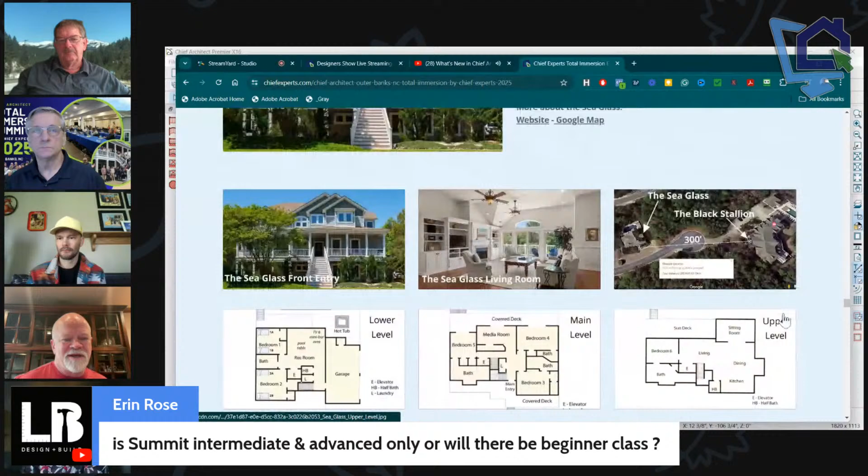It's amazing, I think we had 10 people sign up that have been at the last summit. So that's a little bit right there. And if you're curious about people's reactions to the summit, not everyone sees every post that's ever posted, although it seems like it sometimes. There are some great testimonials from the people who attended this last year, maybe even from the previous year, but certainly you can find testimonials online on the Facebook posts and LinkedIn posts, I think. Take a look at those and you can get firsthand views how that goes.

Sorry about the dog. That's okay. Dan, do you want to answer this question quick?

What is that question? Is Summit intermediate and advanced only, or will there be a beginner class? There'll be a beginner class, we cover all levels at the summit. So if you're brand new to the program, you'll be in there spending time with John and Robin, learning the program from scratch. Plus, during all the other times, you'll have times to ask lots and lots of questions, and we'll get you up to speed.

My class is more of an intermediate when I have a group in my room, and then Rene, of course, would be more your advanced type stuff, really digging into some of the things that we were just talking about as far as hidden features.

So let me get out of that page. You don't need to keep looking definitely at that for beginners as well, you guys. If anybody, Erin, if you're thinking of bringing somebody from your company who's a beginner, we'd definitely be able to help them. We'll definitely be able to get them up and moving.

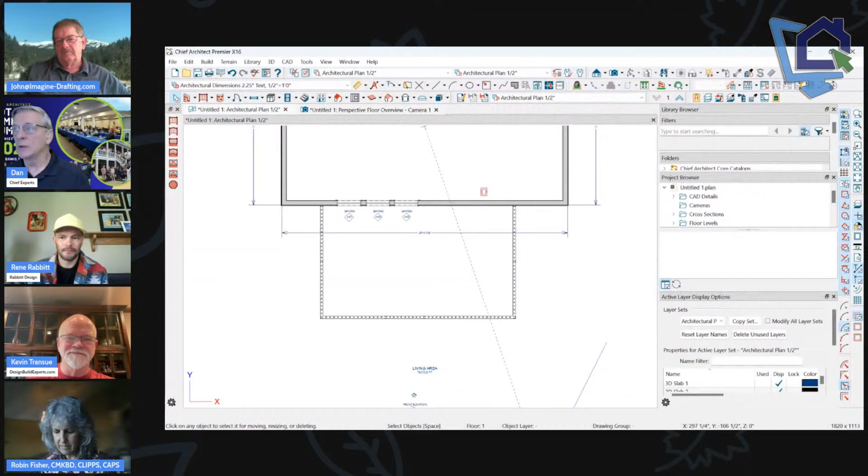So we left off with item 17, railing newel spacing. Let me comment about dimensioning railings. When you put railings in your plan, by default those railings are set up as no locate, so the auto dimensioning won't dimension them. We could turn off no locate on the railings, and then when you do an auto dimension, it's going to dimension the railings now.

Now there's another setting in dimensions I want to point out. I'm in the half inch, let me get to the quarter. I want to point out that if you double click on the ruler icon, there's a new setting in here to dimension newel centers and sides.

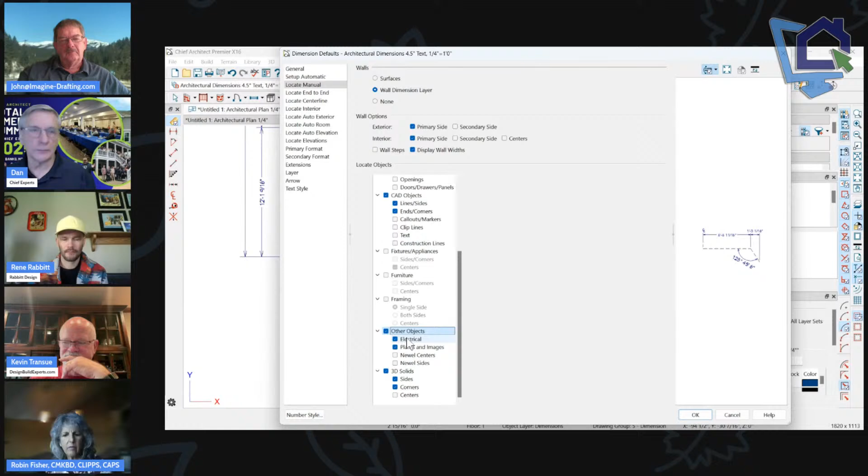So if we turn on other objects, we'll turn off the electrical, and then we'll turn those on. Let's see, I haven't even tried this yet—does the auto dimensioning do that? It does not, so it looks like we have to add those.

So when we do a manual dimension, I probably don't want to turn both centers and sides on, just do one or the other. You can set those up for each type of dimensioning you're going to use. So that's kind of new too, and that's actually quite nice to be able to do that, so that when I run my dimension through here, it's going to dimension the newels.

Then I could click on the newels by highlighting. I'm clicking right on top of the newel, and I'm going to click on this little icon down here that allows me to move the newel to select it. And then I could click on the dimension and type in exactly where I want to move it to.

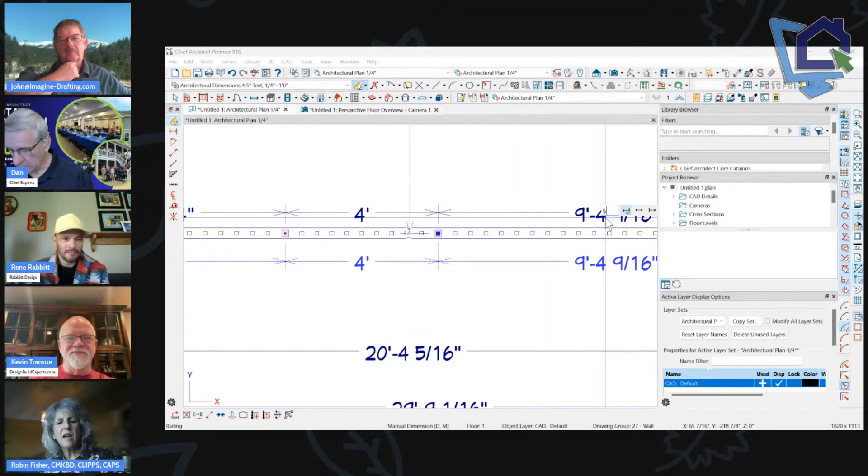So that's a nice bit of out-of-the-box thinking. We always say Chief Architect is a tool to create the thing that you want to create. So a newel is just something that can be dimensioned within a railing.

You could fake it and say that a newel is actually a baluster and dimension your balusters if you wanted to, because we have the capability of dimensioning to a thing within a railing now.

Well, I don't think we can dimension balusters directly, but you could essentially set up your newels to look like balusters.

Instead, just put your newels every 5 inches and have no balusters, so you could dimension every one of them if you really wanted to. Of course, why would you want to do that?

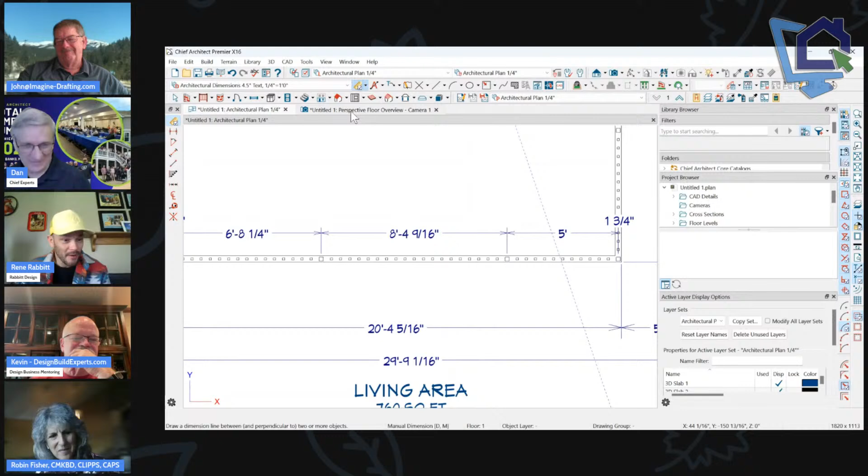I don't know. Well, because a railing doesn't need to be a railing. A baluster is just a millwork symbol. The millwork symbol could be Kevin Transue. And it is, and has been. Okay, we won't go there.

Anyway, so that's a little bit about that. And the other cool thing is you can do that all in 3D as well. I don't know, did we talk about 3D dimensioning yet? I don't remember if that was last week. We didn't really get into that. That's coming up, so we'll wait to do that then, because 3D dimensioning is pretty cool.

You can add newels as well. When you click on a railing, you can add them by clicking on the add newel button. I'm going to select a newel, and then I can add a newel.

So it's basically going to make a copy of that same newel. We have to look for the edit buttons that pop up once we select a newel. Hope that makes sense.

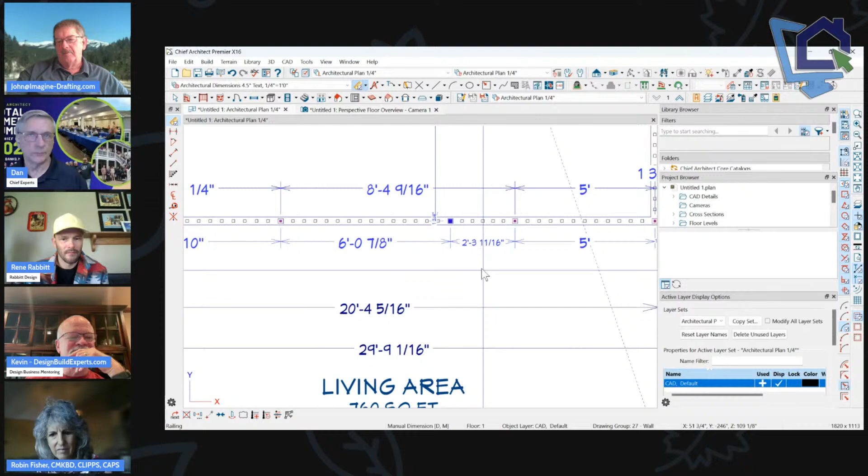And that works really well in 3D too. So in your 3D view, you can click on the railing, and you've got different newels selected. I want to add a new one, so poof, it pops right in there. Then I could add a dimension and put it exactly in place.

Hello, mute that, get those treats out, Kevin. Kevin, you're gonna have to show us your dog at some point since she's wanting to be involved. We'll have to see what she looks like.

So the only thing I didn't like about this new newel tool is we can't use different kinds of newels. I can't put a short newel in with tall newels, like a post, and still have those intermediary ones. Sometimes you'll have a plan where you've got your posts and a beam coming through, and then you might have a post and a post, but you want a couple of short newels where your steps are. You can't do that.

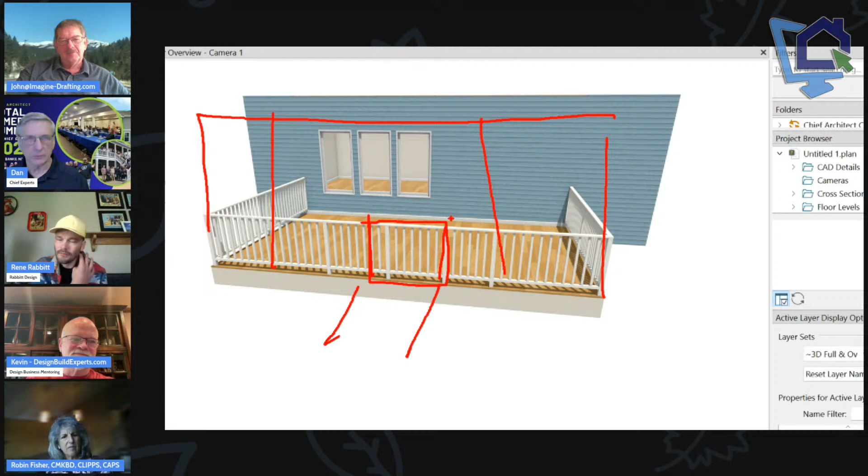So we'd have to create an opening here and add those newels separately. I think we could. Well, you can do it by changing the wall type and then setting that wall type.

Oh, that's true. Break the railing, and I wonder how that would work. Does it work? Oh, cool. I've not tried that. So if we break the railing in a couple of spots and just change it to a different railing type, then we could do that.

Why won't my break work here? Come on. Whatever. You do have to watch out for where you've got ends, like right there. You end up with a double because you've got to watch out for end railings and start railings, or end newels and start newels.

So, yeah, but I could delete that one. Or you can turn it off for that wall section and say I'm not doing end or start newels. Exactly, right, so there are lots of options. It's kind of interesting thinking about how all this works.

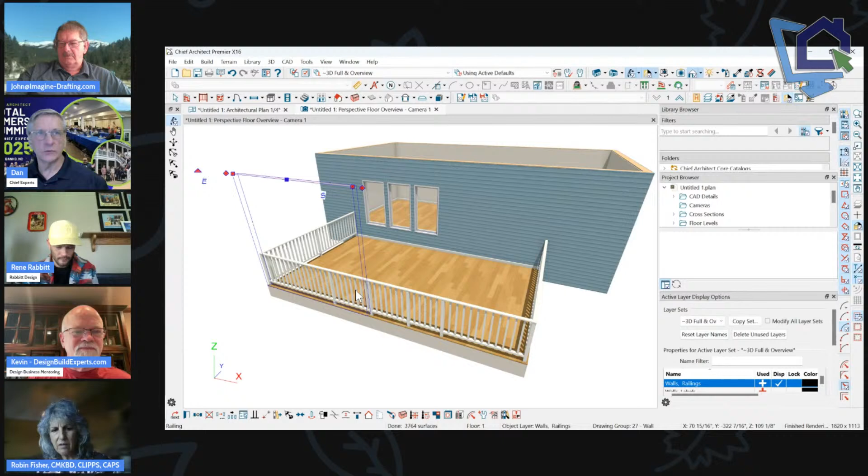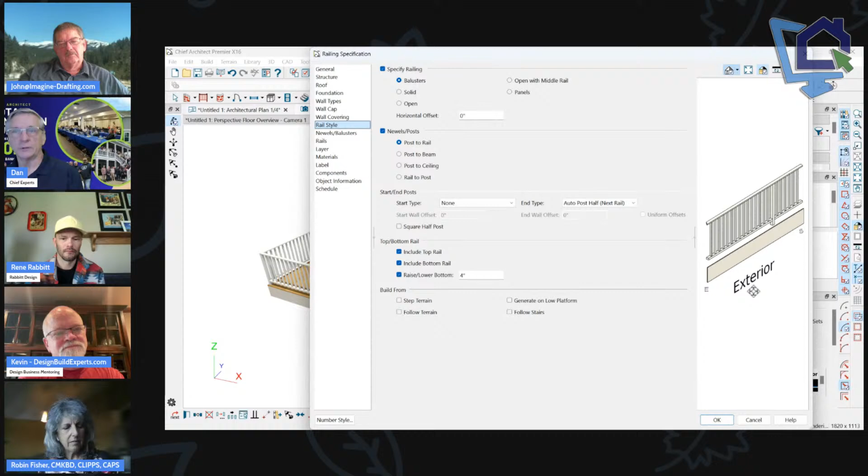When you look at the dialog box, especially for railings, there's so many options now. I always think of it as how do I control all these boxes? I want to add boxes, remove boxes. That's how I think of everything in Chief Architect - it's just a bunch of boxes we're putting in our plan, Chief creating some automatically, some manually. How do we control those boxes? So if you look at these settings with the idea that you're controlling boxes somehow, it makes it a little easier to make sense of this stuff. When we look at rail style, post to a rail, these are different kinds of boxes - how do we control them, turn them on and off? If you take the part out of it that you're thinking about creating this fancy railing, and all you're doing is creating a bunch of boxes and controlling them, that helps a little in the thought process of how you work these tools.

Does that make sense at all? Well, I agree with, I think Bruce Robinson - yeah, Bruce said this up in the chat, but I agree with him.

That being said, I just did a porch the other day where I did it all with slabs anyway, because I was having too much trouble getting everything to go in place. It's just quicker. That works too - it works just fine. So whatever it takes, sometimes you just need to do that. And part of the reason I did that was...

I'll show you real quick since we're on this kind of stuff. That was this one right here - that was version 5, here it is. I'm just in the mode of doing quick, down and dirty, get it done type stuff. But I needed to create a deal where I wanted the steps to come into the slab, so that created a little bit of an issue. I wanted a beam on top, and I wanted steps into the porch, so I just did it all. These are foundation walls, but I did my slab - everything's a slab. It was just easier for me to control exactly where I wanted everything to be. So sometimes you just still have to do that.

I still created a room and named it a porch, but I created everything else out of slabs. These kind of stairs are a little tricky when coming into creating this kind of look. Looks great though - yeah, it turned out nice, and it wasn't hard to do. You create one post, copy it over, and then I can dimension everything exactly where I want it. Just trying to get that set up. But yeah, just thought I'd point that out.

Okay, back to Chief, we're on number 19: add stairs and ramps to the library. Have you ever gone through the trouble of creating a stair, putting all this work into the design, the number of treads, risers, the way it looks, the balusters, the newels, and three months down the road you go, I want to use that stair again - which plan did I do that in? Of course, if you're me, I don't remember. So now you can take any stair that you create and put it right into the library, which is really nice.

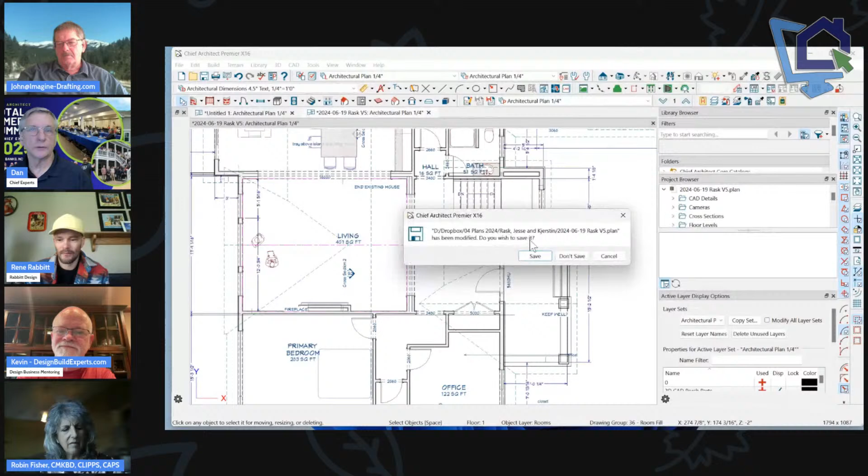So if you're creating a stairway that's like a U-shaped stairway, you're not adding the U-shape manually. Whoa, how'd you just do all that? Do what? Oh, that's secret, man. Fast little staircase you set up right there. Well, wherever the landing is, you click and put the landing in. Okay, I'll explain it - I drew stairs going this way, and then I drew some stairs going this way.

As long as you have the stair icon highlighted, you just click where the landing goes and it puts the landing in for you automatically. It also broke in between where you had a gap there as well.

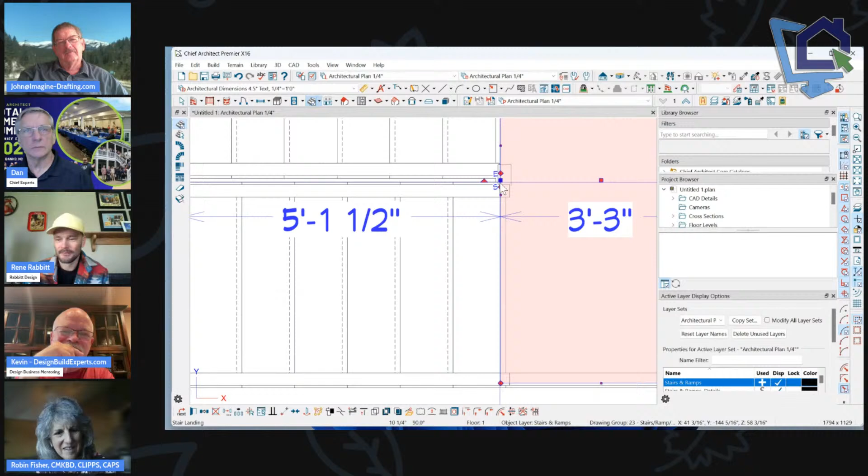Did it turn the railing off there? Let's see what it did. It should be on, yeah it is on. So this platform, this landing, is a CAD box where I can control the railing on every edge of it, or all the edges at once, using this icon here, or by opening the dialog and going in, turning off the railing, has railing apply to all edges.

Kind of cool how this works. There's no add newel on the railing, right? I don't think so, because we can't select the railing.

But what you can do is break the landing. Thank you, Kevin. I was saying the same thing, but I was muted.

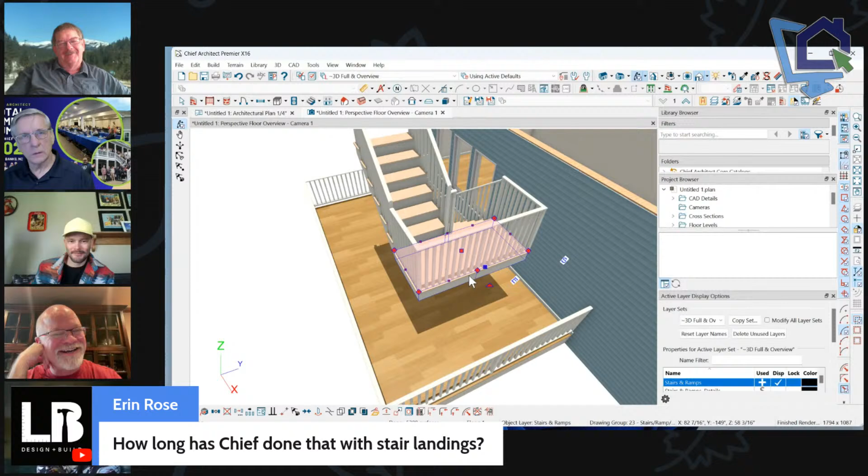I'm just your ventriloquist. So what does that do?

It puts... okay, so this might be. Oh, it just puts a break in the line. It'll put another newel right there. Don't pull it out - yeah, you didn't. Well, I guess my newels are kind of the same, so yeah, I guess that is bigger than that. Okay, so put a break where you want a newel.

How do you curve the inside walls, the inside corners of those stairs? Just the inside corners, like an older style where the railing curves. Are we talking about the corner landing area here? Yeah, well, in any set of stairs, right. Well how do you curve that inside? This is not a stair, this is a landing.

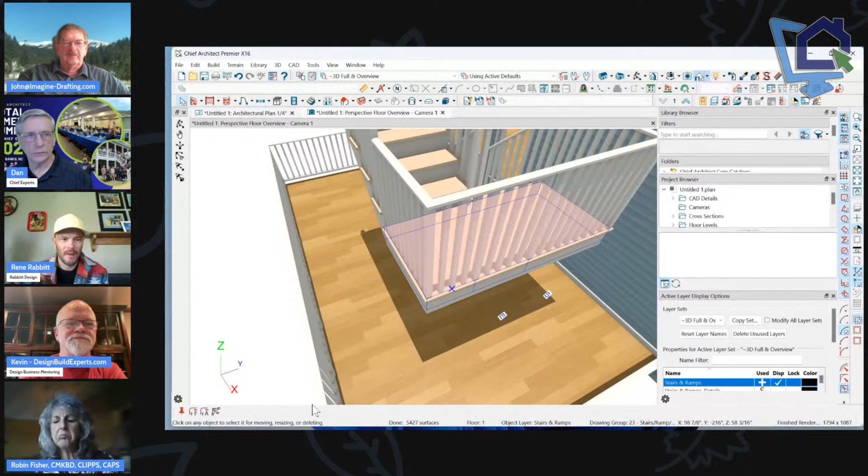So how do you curve those inside corners? You just fill it - fillet on the inside corner. Yeah, hold your F key and drag in that dimension. Yep, perfect, thank you.

That's perfect. I appreciate that. So we need to answer Erin's question here - almost forever, how long has it done that with stair landings? Yeah, almost forever. You learn something new every version, version 2.

And then Mike has a question here about how you need to go through the process of getting it into the library and stuff, so we can see. Let me close up some stuff here.

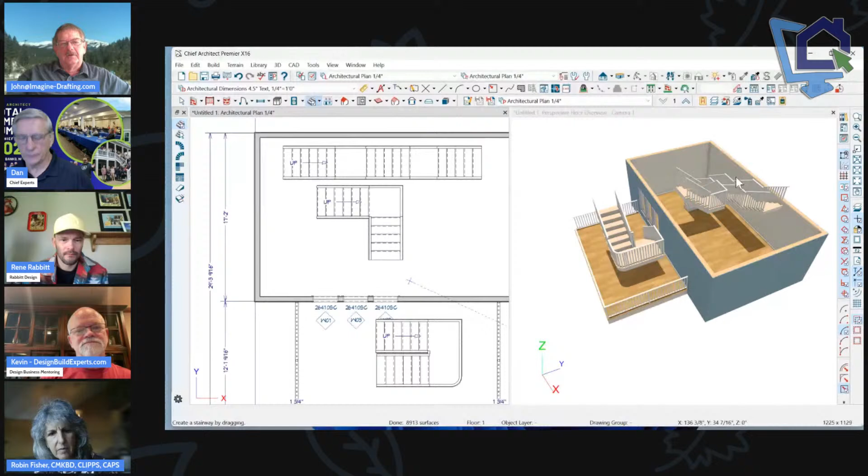If you leave it automatic - let me point out too with stairs, it doesn't matter how your stairs are shaped. If your stairs continue and you need a landing between them, just click between where the landing goes and it'll put the landing in automatically. If you're doing an L-shaped stair and you overlap the stair there a little bit, it'll actually push them into the right place too.

It'll push 'em up. So if we're just overlapped a tad like that, and we put the landing there, see how it's going to put it in the right place. I always dimension this exactly before I put my landing in. That way I know exactly where it's going to go.

I just finished a project where those stairs did creep 6 inches into the other space, and I had to do that as-built, and it kept pushing my stairs out to where they belong. I couldn't - so you have to do that manually, like that.

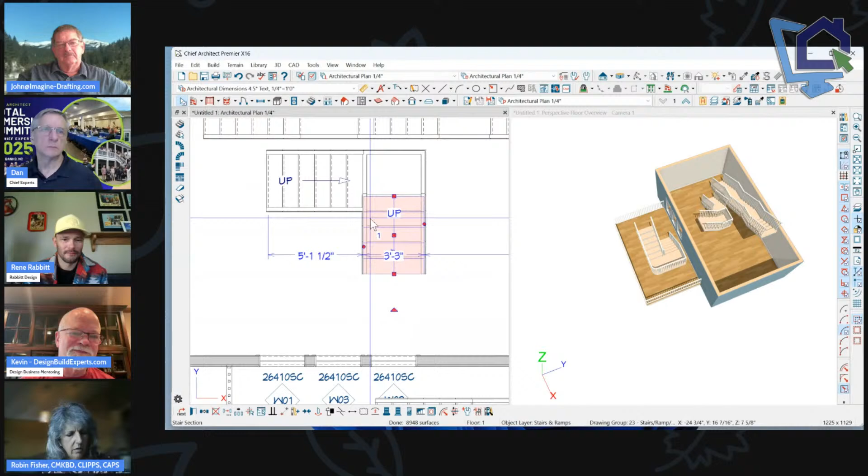Of course, I don't know how we turn that railing off there. Break it and make it a section. Oh, that's true, yeah, do the break tool. Break it there.

Retain it - did I need a complete break on that? I needed a complete break on that. So that's the tool where we hit break, then we have to hit this icon right here with the C on it. That adds a complete break, which now lets me change this whole step totally independent of any of the other steps in my plan. So I can take the railing off right there.

So now I can - you have to shift select it. Do I have to shift select it? Yeah, that's right, to just do that one. That's another little trick. So I could turn the left railing off - now I have no railing on the left. Or the right - oh, I'm going up. Okay, so it should be the right railing, I was thinking it was going up that way. Yeah, so we'll go that way. Now we just have railing on one side.

So turn the railing off on the landing and you'd be good to go.

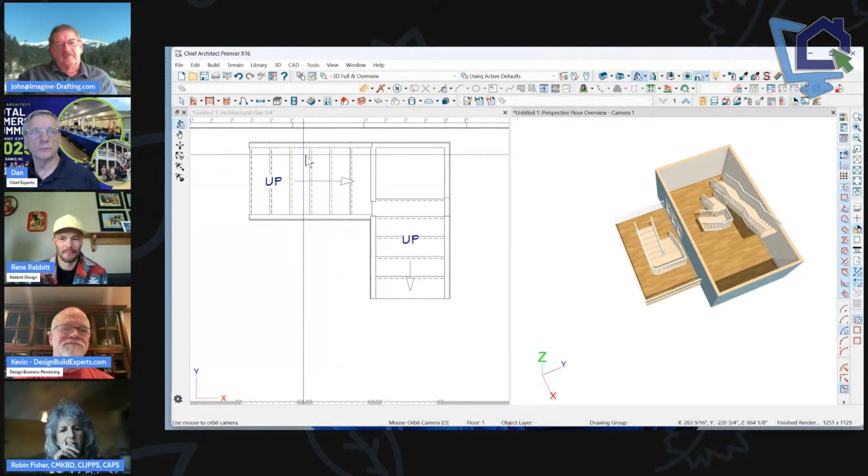Turn that railing off there. Someone will still fall to their death, but something didn't get connected properly.

Anyway, how do we save it to the library? Just click on it and hit the library book icon. But then you have to deal with Mike's question.

When you save stairs to the user library, how does that account for different ceiling heights? It doesn't let you say anything. But you can still click your stairs and it will automatically adjust heights so long as you don't change that.

See, in the preview, when I added it to the library, it didn't put in that whole stair. It just put in one section, just a piece of the stair.

When you want to create new stairs out of that style of stair, you just start drawing again, and now you'd be drawing with that, not the default stair that's set up in the program. It's like a style palette for stairs only.

Bingo, yes. That's a really good analogy of how that works. Good job, Kevin, nicely done.

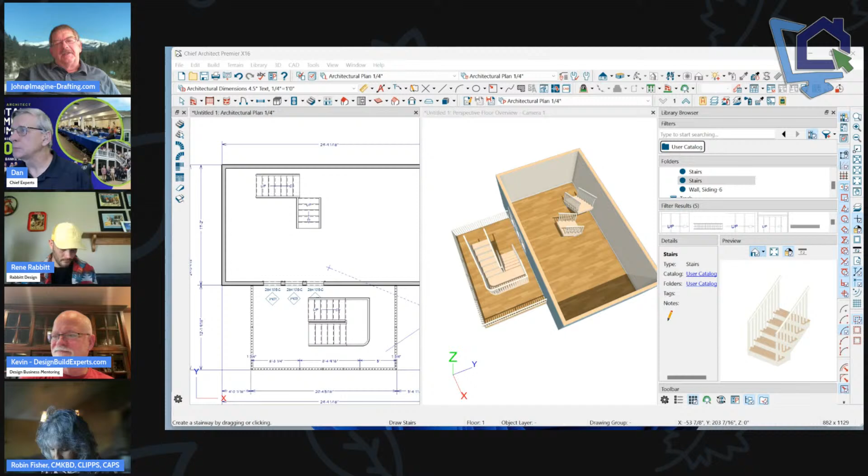Dan, I need to apologize to Aaron. I feel like I kind of jumped under the question there, and I didn't handle that the way I should have. So anyway, I apologize, Aaron.

What happened? I missed some. Yeah, me too, I jumped under the question and just said that it's been there forever, but we don't want to do that.

Oh, John and I always have fun with that. We'll show people a feature and they go, how long has that been there? And we go, yeah, for like 30 years. As long as we're on that topic, the part that's even more fun is when Dan says, well, how long's that been there? Yeah, exactly, I do that too. It happens to all of us. And it's just part of the deal.

But yeah, creating a landing by clicking where the landing should go, that's been there for a long time. Now you got it, so there you go. There's a lot of function in this program.

That's amazing. All right, add stairs to the library, corner shelves. That's just what they are. Pick on the shelf tool in the cabinet pull down, and you can now click in the corner and do corner shelves. And then you can click on that and open its dialog and tell it to be an L shape or diagonal front.

And then you can stretch it out. So that's helpful, it's another little feature that we don't have to mess with when we want to create corner shelves. Instead of using two shelves, you use one.

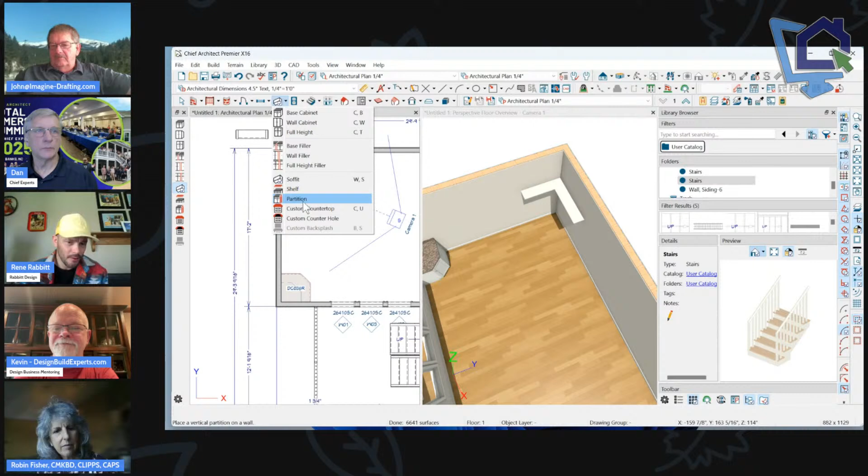If you double click your shelf tool, does it give us the ability to change that corner to not a diagonal as a default? Oh, under defaults for cabinets, let's look. Yeah, I could have just double clicked on the cabinet tool. Can I set the shelf default? No, that's locked in, it's always going to start as diagonal.

If you click on the one that you made that is an inside corner, can you set it to default now? I don't know, let's find out. No, we can't. Okay. I bet I can't do that with any of the corner items.

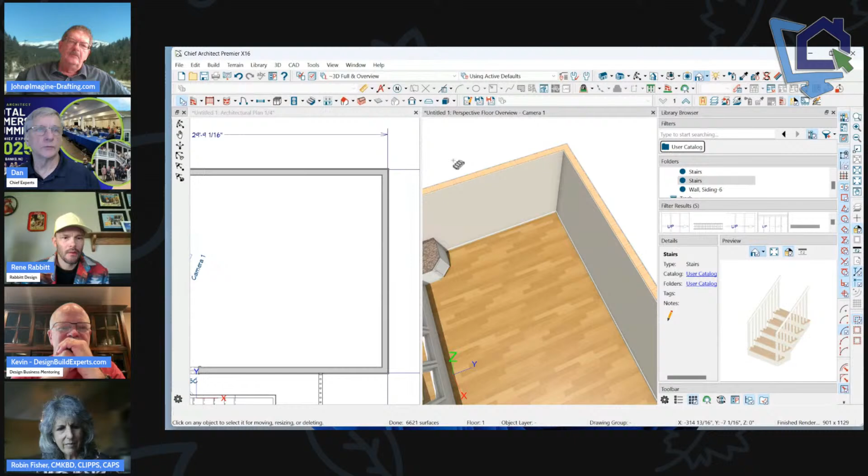So let's click on a cabinet. No, I can't set that to default either. So only if they're in the middle, straight on the wall, then you can change them and set them as a default using this icon. That would make it the new default in your plan, so everything you add would be that now.

Good question. I suppose it'd be tough, if you stretch something out real goofy like that, you're just confusing the program more than they want to be confused if you make that the default. Really the default is about the style, but it's also about the size too.

Do this. Can you do this? Can you place a corner and then make it L-shaped? Corner shelf, and then yeah. Now, can you make that default? No, we can't. We could add it to the library though.

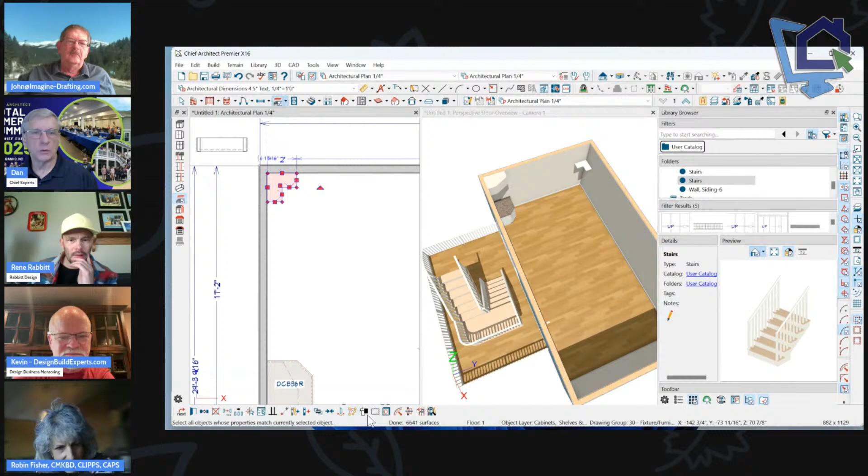So now, if you set it back to none, make it the default, and then try to place it again, does it become an inside corner? It does. So you'd have to place a corner shelf first.

So just open that, make it L-shaped. Okay, press OK. Now bring it towards the middle of the wall. Well, yeah, it maintains it. Now turn it off, open it up and say none. Well, that'll make it a flat shelf again. Now make it default.

Okay, now use the shelf tool to auto place a corner. Is it an inside corner? Let's find out. By golly, wow, you did it, Rene. Good job.

What was the step after make default? Kind of convoluted, huh? What was the step after setting default? After make default, just place it. Do it from the cabinet. Then just move it. Okay, then place. Okay.

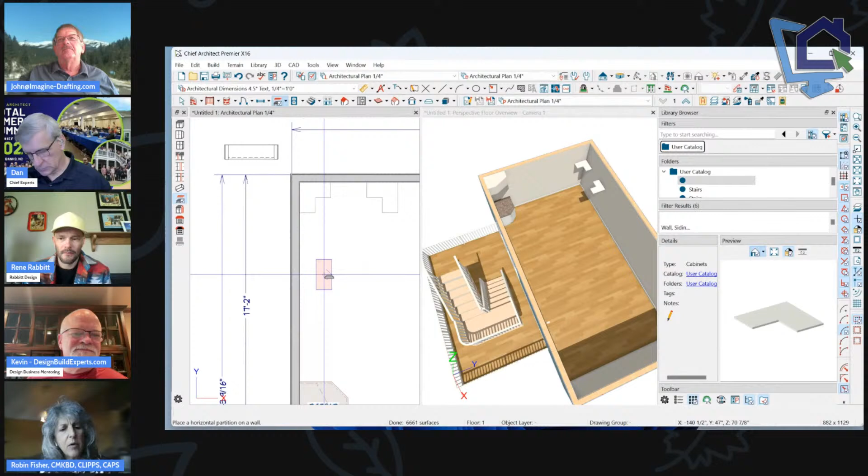So if I look at my defaults now, they're still not set to either or. It's still set to none, but it did hold that corner shape. So now when you take it, can you put a new shelf into the corner? Is that what you just did? Yeah, he did. Okay, got it, I was writing it down at the same time you were saying that.

Does that rule hold across sessions? Does that actually make a permanent change, or as soon as you come back into it? No, I mean, you'd have to commit it to your template. Right, yeah, that's what I was just wondering.

Yeah, so let me just put this in, Rene, so that will work in a corner cabinet too, so we don't have to deal with those angle cabinets all the time. Got it. So if I close this session out, get out of Chief, and we come back into it, and I open that plan, will it still do a corner shelf?

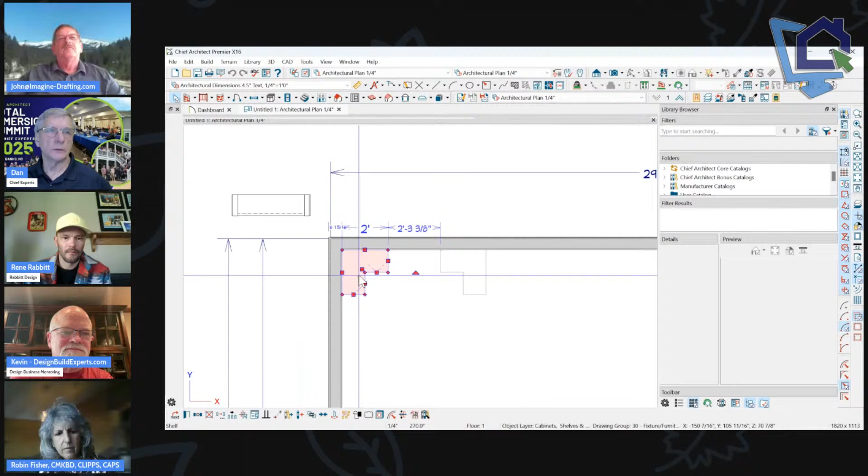Let's find out. Look at that, Rene. You nailed it, man. All right, cool, nice. So you created the L, you pulled it away, you made it none, and then you made it the default, and it held that L shape for some reason.

That's funny. You could probably do that with your cabinets, all your base cabinets, soffits, and everything else too. So it's a nice option, I like that, that's cool. I always want to know is how did you figure that out? Yeah, that's hours of time, we're not even going to go there.

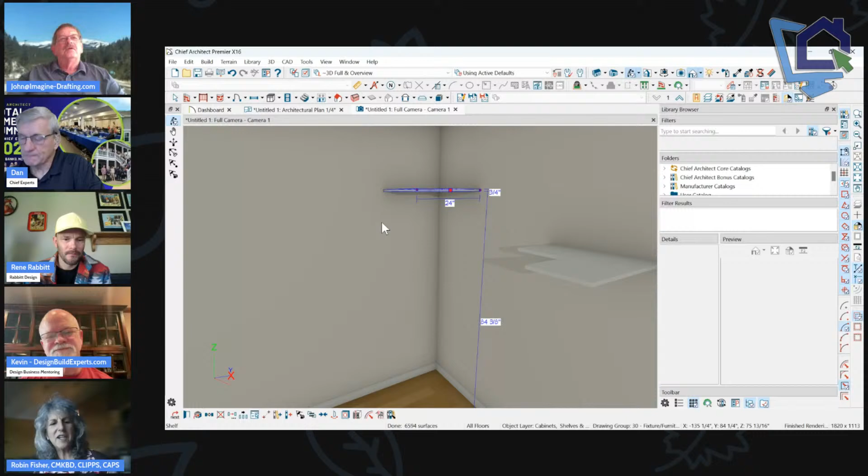Did it really matter that you made it none? Was that step actually necessary? Maybe not, yeah, maybe not. Okay, but it works, even so we're going to deal with it in the corner. Good point, well let's not dwell on it.

Just real quick, you want to make more of those? Let's go make 6 more copies, and we're going to space them all out at 12 inches apart. So I hit transform replicate, this icon right here, and we're going to space these out all at once. So 6 more copies, 12 inches apart, but we're going to go down, so we need to put a minus in front of that 12 and click OK.

See the Z right here? That's this little thing right here, that's the way we want to make our copies. If you wanted to go Y or X, you just look at the other ones. Click OK, and there's your shelves. You could also do that by dragging them using the multiple copy tool. If you can get to the 4 handles, get to the multiple copies, set your multiple copy, evenly distribute 3 or however many, and then do it that way too.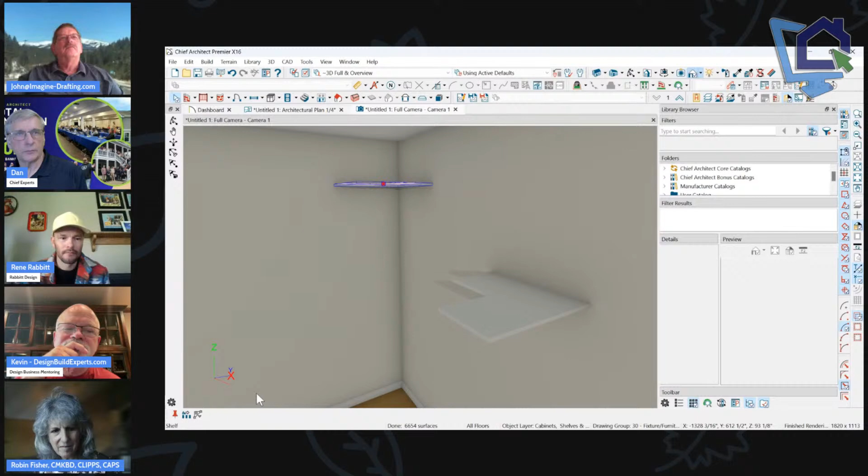Oops, I missed. Let's hit multiple copy again. Why is it not working? It's only going side to side. I bet I'm grabbing the wrong button. Yeah, I got to get this handle right here. That's the handle I need. There we go, now we can do it.

Nice, anyway, lots of ways to make copies. All right, let's keep moving on. We got two done so far. We're going to be on this for a while, you guys, but we're learning. Build framing panel, which is really cool now.

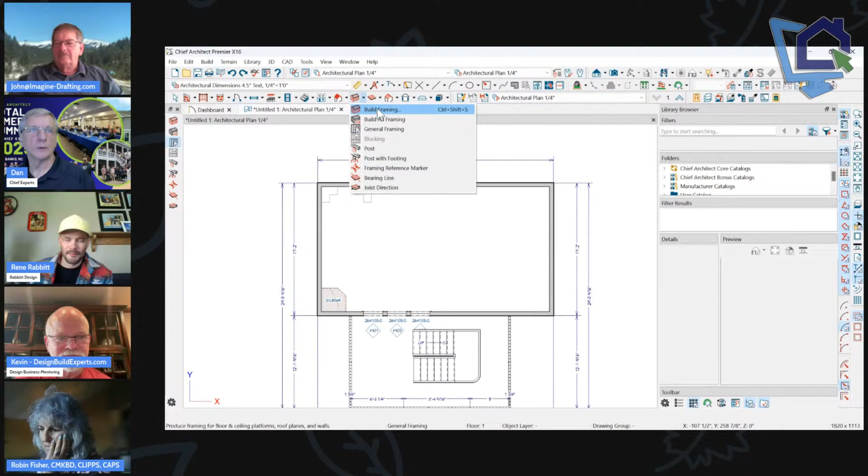So whenever you click on the... where's it? Right here. No, where'd it go? Right here, build all framing. Okay, no, that's not it. We want this one. Yeah, so we want to click on this first one. This one just builds all the framing. That doesn't open a dialogue.

So we want to choose what to build. What we used to have to do, we used to always click this menu, and then click through each floor, find what we wanted to build, and click on it. It was really a pain in the butt. So this makes it really easy.

So I want to automatically build all of these, or maybe I don't want to do my walls and roofs, I just want to do those things. And they've added a separate option for ceilings now, finally, so now I can do ceiling framing all by itself. That always used to be where we had to build all framing to do ceiling framing. Now we can do it per room or the whole plan, just the ceilings, which finally encompasses all the things we need to frame.

Ceilings were missed up until this version, which always baffled me why they didn't put that in there. But they got it, so we're good to go now. So that's a nice little setting. Again, just click on that one. I wonder if that's that part here too. General framing - yeah, this is where you would set your defaults.

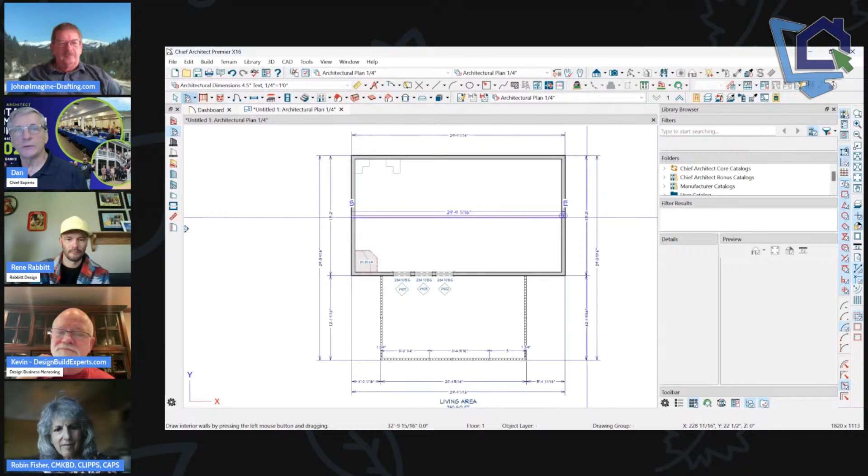So never mind, okay. Truss direction lines. So when you... no, flat header, I missed flat header, heaven forbid. So sometimes you're going to have walls in your plan that you don't need a header above, any kind of structural header. You just need a plain old flat board to nail your trim to.

There's no support involved. So if I were to click on that door or window, open its dialog, go to the rough opening tab, the framing tab, you have the ability to specify what kind of header you want above that door or window. We could call it a flat header. So now it'll be 2x flat headers, whatever the thickness of the wall is. This is a 2x4 wall, so there'll be 2x4s, because the thickness is determined by the wall type.

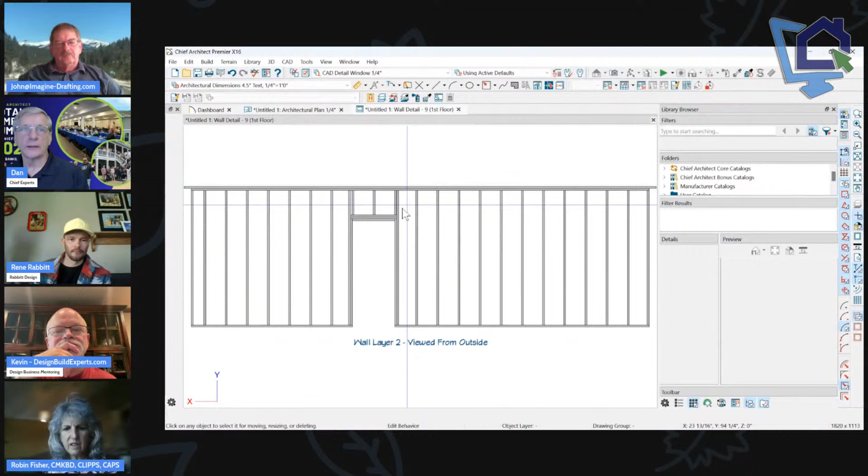So now when I click OK and frame that wall, let's turn the framing on here, and then go look at it by clicking this button, open the wall detail. There's your flat headers right there. Okay, it would have put a third one in. So it put that in plus a third one. That's weird. Yeah, so just something to be aware of.

Another little thing they added in X16, which is kind of nice: you might be working on framing and decide you need to change something. If you click on any item in this view, you can now rebuild the framing for that item, for that wall or roof panel or anything you've clicked on. So I can rebuild the framing for that item right now, which is really handy. I don't have to go out of this view, click on my floor plan, rebuild the framing, and come back into this view. I can just do it right here.

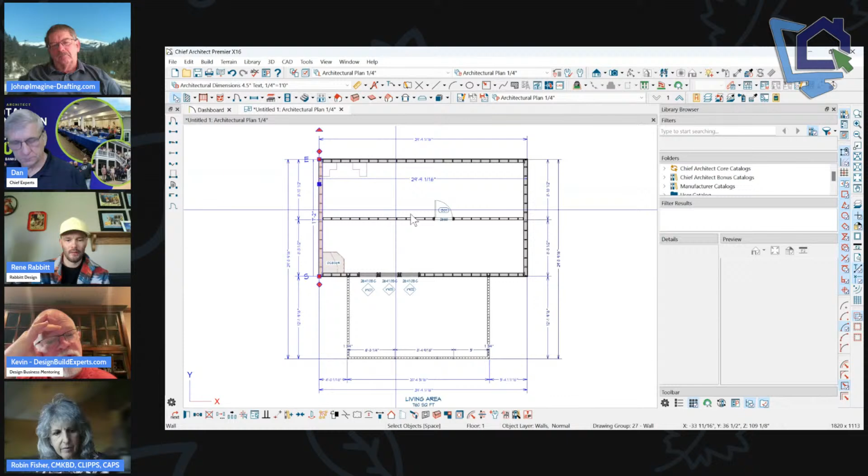Dan, just the other day, I ran into a situation where I ended up rebuilding the framing in this roof multiple times as I worked through a design, because if you lay the framing out for a hip roof with a clipped corner, it chooses very strange things for the framing. Some of the framing would not align, even on opposing sides of a ridge, so sometimes it was 18 inches, sometimes 16, sometimes 24, whatever it happened to decide.

So could I have clicked on that and it would have rebuilt the framing correctly? Or is it just going to mess it up in a different way? It's going to rebuild all the framing in that object. For that entire roof plane or for the entire roof? For that entire roof plane.

So it should have made corrections to it if that tool does what... Yes. So again, you just click on the item and reframe just that item, not the whole thing. Oops, wrong icon. You don't want to use this to rebuild that. That would build the whole plan.

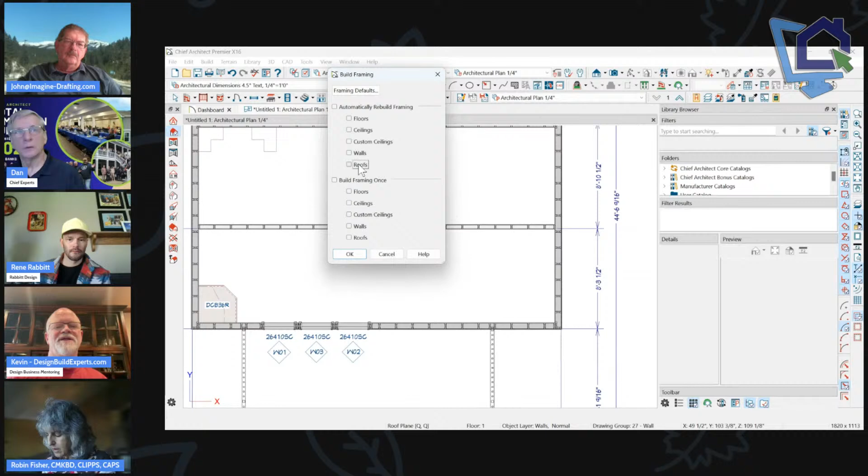Oh, it's interesting. I learned something new today. All right. Hey, we're on a roll.

Can you answer Aaron's question here? Is there a way to freeze custom framing so it's excluded from the rebuild command? For walls, yes. Roof, let me address that in just a second here.

What am I doing? I'm making those gables. For walls, anytime you put framing in a wall, like I changed the framing in that wall and I want to make sure it doesn't ever change, you open the dialog for that item and you go to Structure.

And you go to Retain Wall Framing. Once you do that, you'll notice that now when I click on that wall, I don't get a framing icon anymore. I can't rebuild the framing in that wall. And if I rebuilt all my wall framing here, it would not redo the framing in that wall. So yes, you can lock that out.

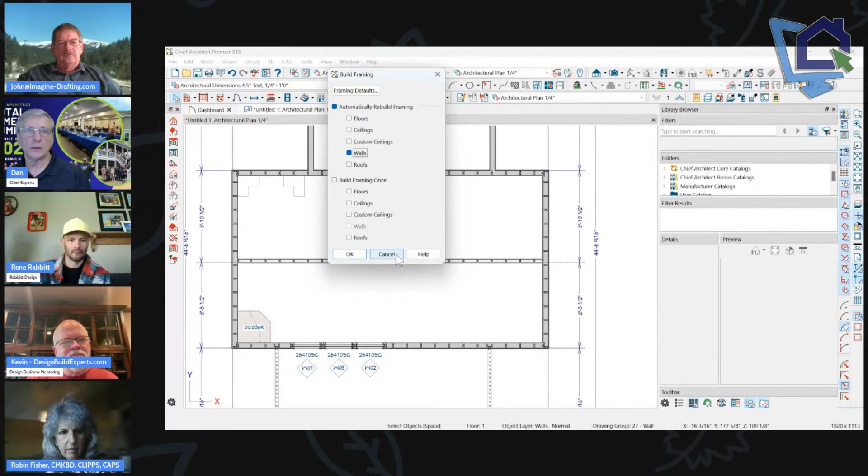For the roof, yeah, go ahead. For that wall, yeah. For the roofs and floors, I don't think we can do that. If we're going to rebuild all the roof framing, it's going to rebuild all the roof framing. What I generally do is, depending on what I'm working on, I might just frame one roof panel at a time.

So let me just go build the roof here. So if I want to just frame this roof plane, or both of these, I could do that independently of all the other roof framing in my plan. So that works really well. That's just something to keep in mind.

Oh, that's really good. So when I'm doing room additions and things like that, I'm not going to frame the whole house. I'm only going to frame the new stuff.

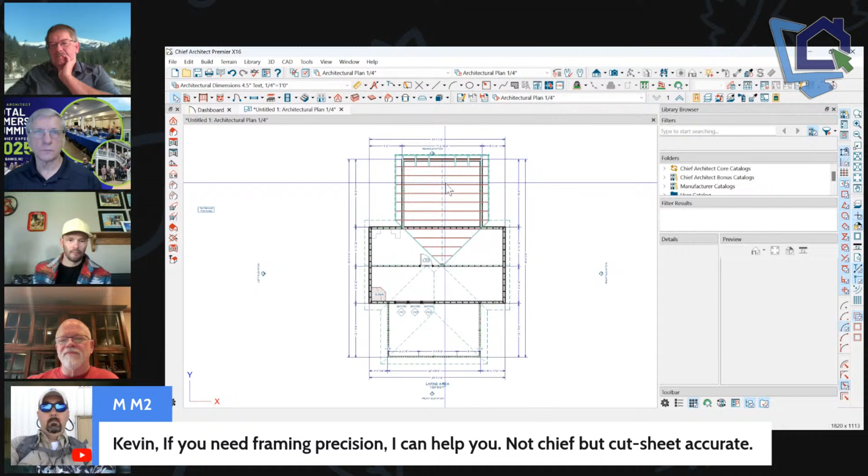So now if we do this next truss direction line, Chief does have a girder line now. Where's that? I don't even know. It's probably under the roof tab. Oh, Roof Purlin—that's a new icon, isn't it? You can add roof purlins manually.

Cool. Girder truss line. So if we put that in, let's say I want to have a girder here because I'm going to open up that wall. So I'm going to take this wall out, and I need a girder to support that whole section right there. So I could put a girder line there.

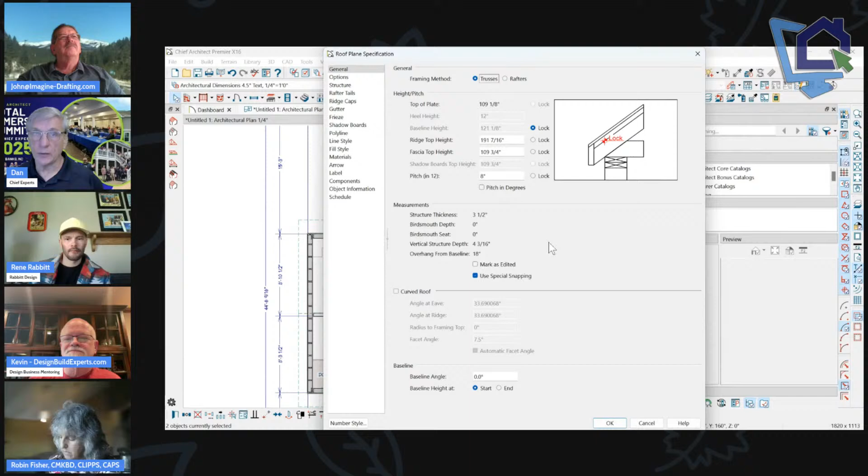So when I build that roof framing now for these two roofs, I've marked the roofs as trusses. That's important—you can do roofs, trusses, or rafters for the entire plan. Then independently, you can click on roof planes and say, I want this roof to be rafters and I want my other roofs to be trusses. So you can turn it on and off for different roof sections you're working on, which is really nice, because then if you build the whole plan at once, whatever you call rafters will build, and whatever you call trusses will build. Then we click OK.

And I'm going to go ahead and build my framing and see how I put the girders there. Let's say—you wouldn't normally do this, but let's say I want these trusses to go this direction. Then you put a joist direction line in, I think that's what it's called, and then I could get the trusses to go here. Let's see if that works. I'm not sure if it does. No, it didn't do anything.

They showed something in one of their videos about how you could switch directions - I think it was joist direction, or girder. Let's see, custom framing types... I don't remember, but you could switch directions. Let's try this one. Oh, roof truss direction - there it is. Not the joist direction, it's roof truss direction. So if I want these trusses to go that direction from that girder line I drew, these will go that way and then these will stay that way. So you can switch the directions by doing that.

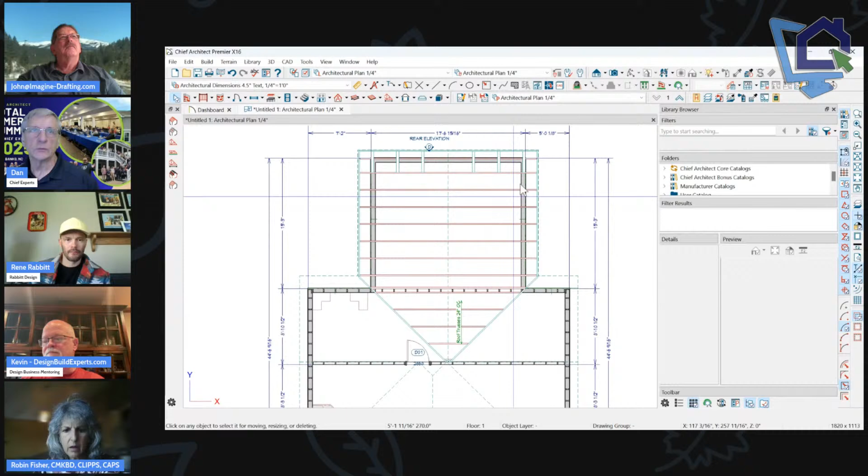So if I click here and hit build framing, now, again, not that you would do that, but you could. Who knows why you would want to do that? Maybe that's the right way to build it. But you can do it now, so that's really nice. That makes sense. Any questions about that?

24 custom framing types. Anybody know what that means? I tried figuring that one out. If you were trying to do advanced framing or double wall framing construction, would that be there? It's something to do with framing materials associated with framing materials. It made no sense to me. Rounded, IC, I don't know. We'll skip past that one. One day I'll figure out what that means eventually.

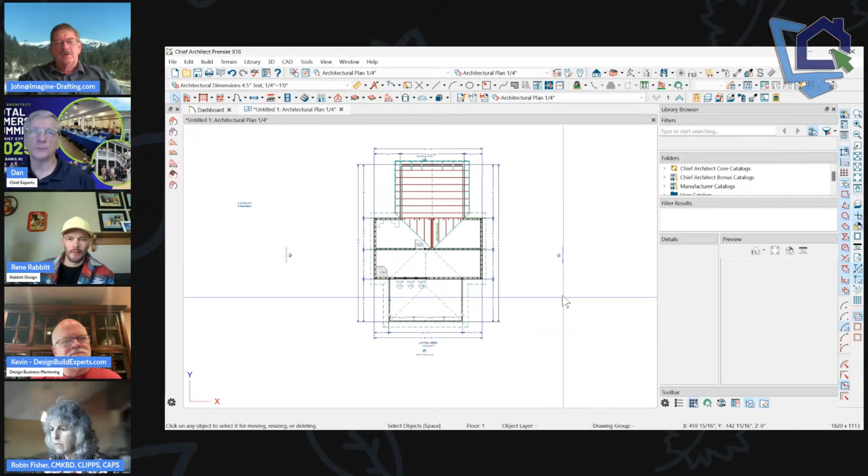Maybe if you guys happen to know, let me know. Deck controls - what did it say again? Number 24, figure that one out, John. It says add, remove, or modify framing material associated with framing materials. Define material composition like wood, steel, or concrete, and shape - rectangular, rounded, or ICUs. Okay, it made no sense to me.

All right, let's go back to our deck information, because we got some cool things going on with that. So again, anytime you name a room a deck, it's going to put the deck framing in. Because I don't have a foundation, it put the deck framing on the same floor as the deck. As soon as I add a foundation, build foundation, click OK, now it's going to put the deck framing on the foundation plan. So that's how that works.

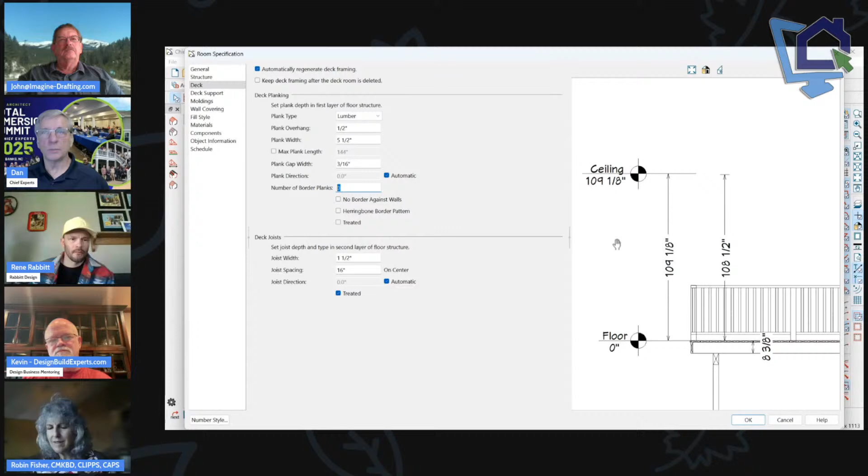So what we've got now in the deck room dialog box, under the deck, is the ability to, when we do a border plank around the deck, put the blocking in for that automatically. So if I say do 2 border planks, click OK, and then rebuild the deck framing using this build deck framing button, you're going to see it put that blocking in. So the 2 deck boards would be supported by the blocking. So that's nice - now we don't have to do that manually. It even does the corners, which is another nice touch. I don't know how many times I had to go do that to decks to show that framing - more than I want to think about.

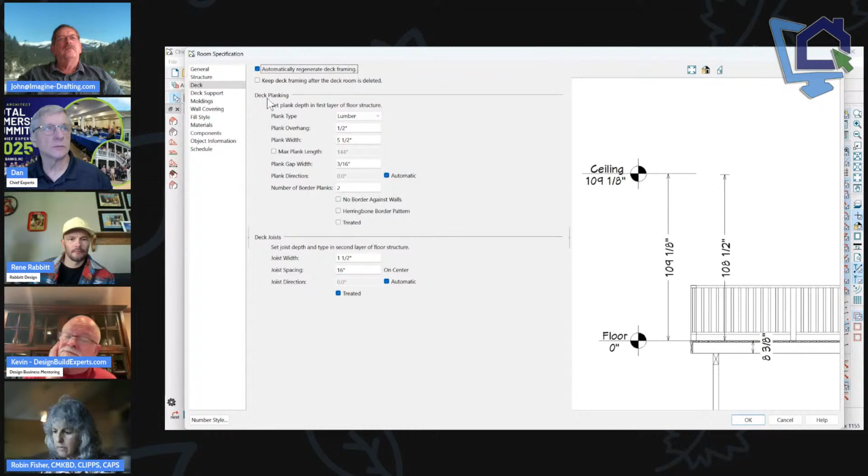The other thing you can do, again in the deck dialog box under deck support, you can edit the type of beam you want, lumber, what kind it is, how many beams there are. Let's see, where's the number - where's the count? It says member count up at the top, oh there it is, thank you. So how many beams do you want - okay, you want 2. I want those to each be, not 3.5, but 5 or whatever size you want. So maybe you're using laminated beams that you're going to wrap up. You can see it just changed it - that's cool. I love how it shows what it's going to look like too.

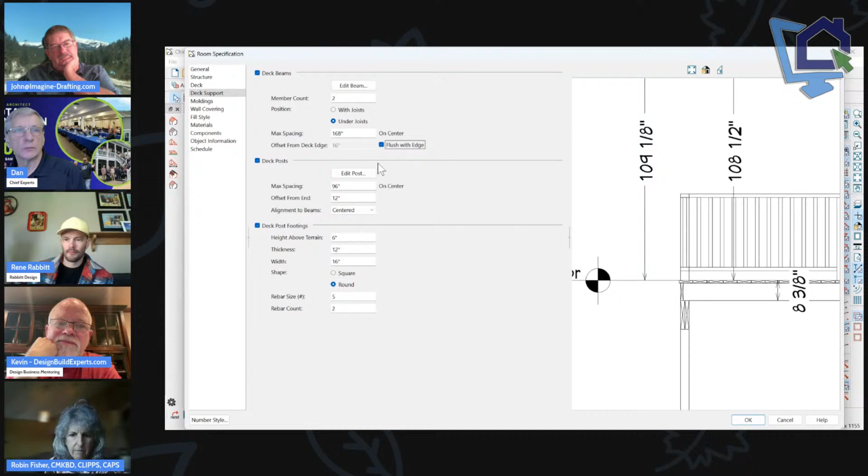And then we can position those in different places - offset from the deck edge. I want the beam to be even with the edge of the deck. That one's been a real problem to get to behave, especially in a complicated deck, because it wants to force things to certain positions. Sometimes I like to just put the beam in with the floor joists, and I think we can do that now. We go flush with edge, and then we're going to go with the joists. So now I can put the beam up in with the joists - that's another nice feature I like.

Or if you're doing a beam in the middle, and you want the beam to be up in the joist, and the joists hang from it, we could do that here with the joist and under the joist. So that's really nice. You can check out your deck post spacing - if you want a lot of posts in your deck, you could do that. It's going to put those posts spaced in whatever you tell them to be. There we got a lot of posts on the end, holding up a lot. So you got a lot more control over that deck spacing, which is really nice.

We have a few questions here about decks. How can we show the deck on both the foundation layer and the main layer?

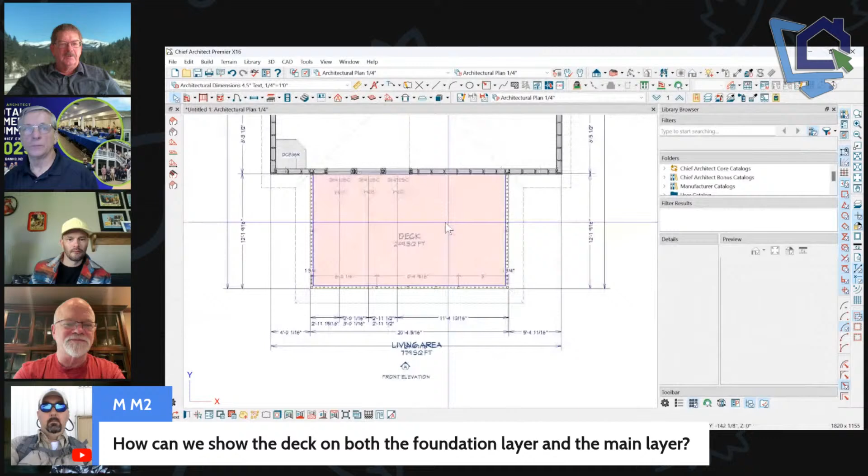How can we show the deck? Well, you can use reference plans. I'm not following—when you draw a deck, it doesn't show up on the foundation. Well, the framing will, but not the deck itself.

What I always do for that, a simple way, is just draw some CAD lines and put them against the deck here, then make those dotted lines. It's a little extra work, but it's old school. Then I'll copy that and put it down below the deck by hold position, so when I turn the framing off, it just leaves the dotted line.

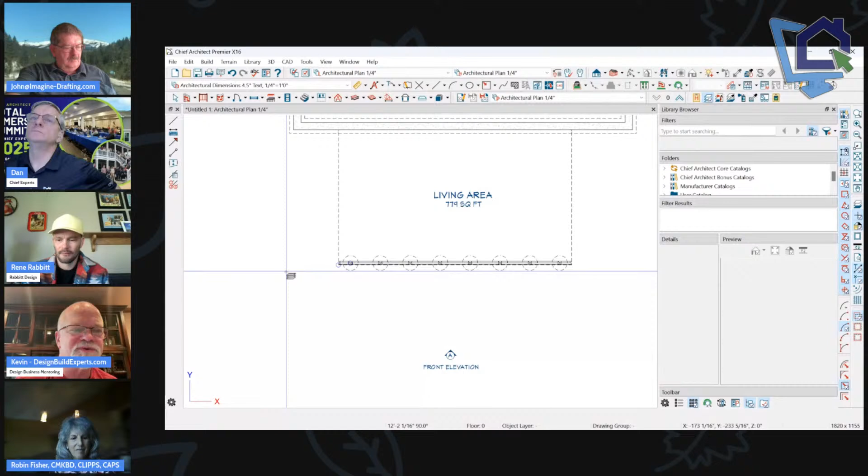If you want to go new school, then Chief's reference plans come in really handy for that, because you can create a view that is only the components you want to reflect through to the bottom floor, and use that as a reference layer so you can see things exactly as you want them.

The thing I like about the CAD lines method is now I can dimension everything. So when I want to dimension all my footings into place, I can do that by adding a dimension line and dimensioning them where I want them to be. That's partly why I do that technique.

I don't think we could do that with a reference plan. I don't think we can dimension the reference plan itself. Plus, we'd have the reference here that shows the railing above, and we'd have to save that as a separate plan in order to reference just the deck part of it.

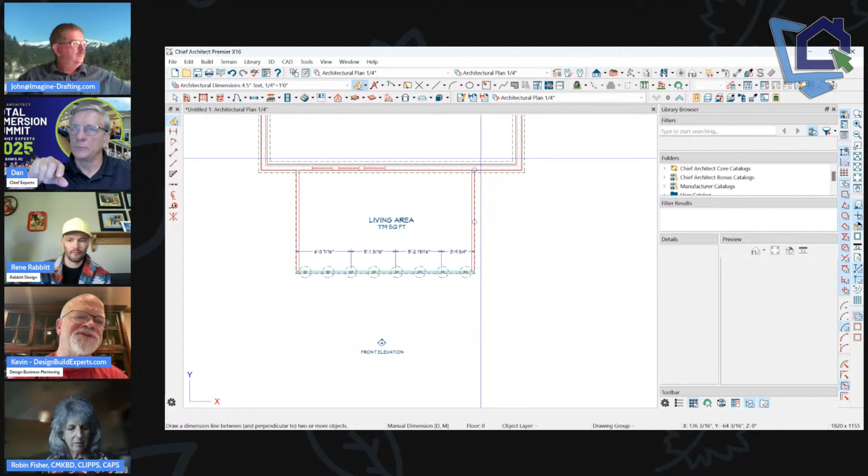Is that what you're talking about? No, you wouldn't, because you just create a different view for that—create a different reference view. Right, for the deck. Okay, yep, I get it.

Here's another question: is the warning message of deck over a room a bad thing? Yes, it's a pain in the ass.

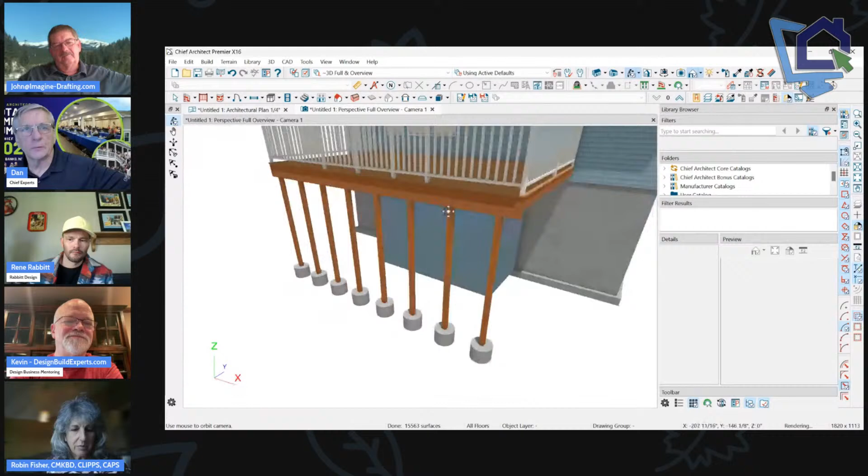The reason Chief does that—if I go down here and put a room under here, I'm going to call that a room that I'm putting a non-deck room over. If you think about this logically, if that room down below is like storage and is supposed to be watertight, that's going to be a problem because I have holes in my deck boards, unless you put a waterproof system underneath the deck.

Right, so here's what you need to do: add a roof to that manually, put that in there, and then actually draw an invisible wall here and make that not a deck room—make that a balcony or something like that. Turn the floor off and still leave the deck boards and all that stuff, so you need to define a different space above that room below.

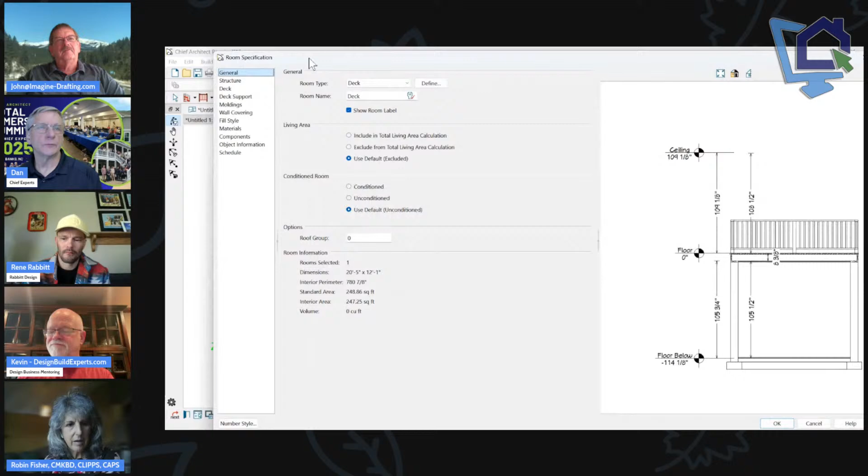Generally, if I want my deck boards to stay but I'm going to have a ceiling and roof above that room below, I'll just leave the deck boards here. You can actually go into the room named deck, under general, and there's a setting—if you turn the room name deck off, there's 'keep deck framing after the deck room is named.' So now you could keep the deck framing but name it something different.

So we'll go to general and name it something else, like bedroom. Okay, it didn't keep the framing of the floor. I think that's not what I do—actually, it did. Doesn't the message actually say you're building a deck over a non-deck room?

So how about naming the deck below the room below a deck and just changing its components—making it a different deck style, like concrete? I suppose you could do that too. I never thought of that one, John. I've always thought of it, but never tried it. Well, it looks like it worked.

Oh, no, that's still a bedroom. Let's name it a deck again. Well, they liked it. If you name it a deck, though, everything you do with regard to framing or anything else is going to treat it as if it's a deck.

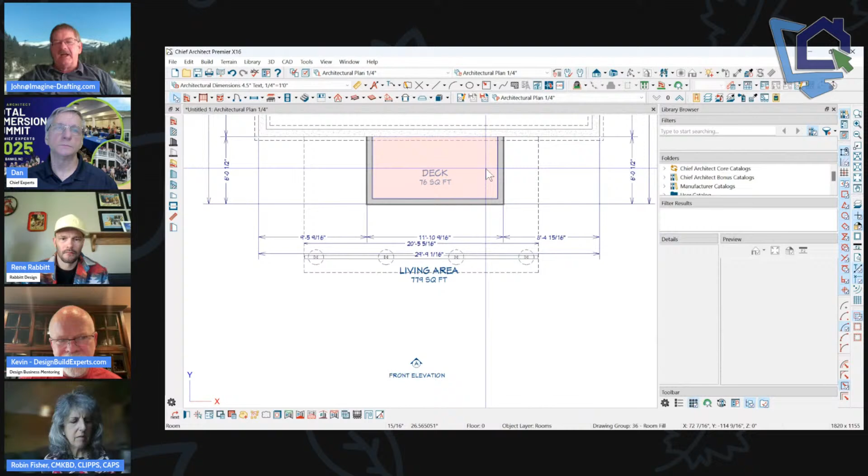You can make another deck type. You could take that room type deck and make another room type that you could put a concrete floor in instead of framing. Yeah, but I think at that point you're still going to get the message because it's not going to treat it like a deck, the room below. It's going off the room type. It's not going off anything else.

Now think about this for a minute. What John's talking about, the room name deck has always been there. The room names, when you hit edit, these room names have been there since version 1. And the idea is that these are your typical rooms that you're going to build off of. So the room name deck is always meant to be like — again, the logic behind it is it's going to leak through to the room below. You don't want that to happen.

But if we went in here and we just named it, you know, 'room' or whatever we're going to call it, and then went under structure, we could say, well, I'm going to put in flooring with, you know, 2x12s, whatever. So you could change this to be whatever you want, and that's what it would frame in that room. Then walls should frame just like regular walls, but now you've eliminated that hassle of that error message.

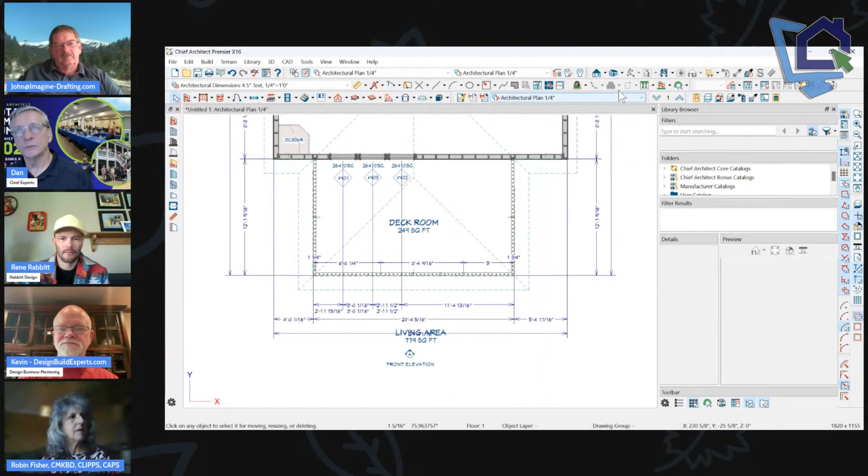So if we did a cross section through here — there's our deck. We got the deck flooring, but I could change that to something else. And yeah, that's a good solution, John. I like that. You could also make another deck that's got a roof underneath it with sleepers, you know, with that whole system. Yeah, so that might be the solution.

We could even name the deck. Well, I tried that before. We'd have to dig into that a little bit more. We don't have time for that. Oh, Jesus! Right, look at the time already.

Okay, yeah, I have a question. I don't know how you specify a deck railing type versus a non-deck railing type in terms of creating a wall type.

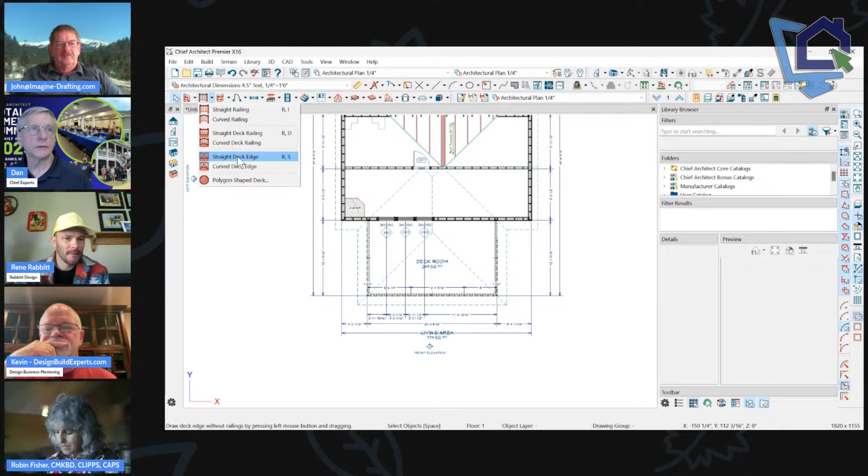Well, I wonder if we create a straight deck railing. I have never seen anything that designates one separate from the other. I think that's built into the system — it just knows. So the only way to designate something as that is you have to set it as default. Interesting.

So we could create deck railings of different types and then add them to the library. And I would assume it's still going to have the deck setting in it. So if I go down here and draw with that now — where'd it go? Right here. I've tried that. That doesn't seem to work.

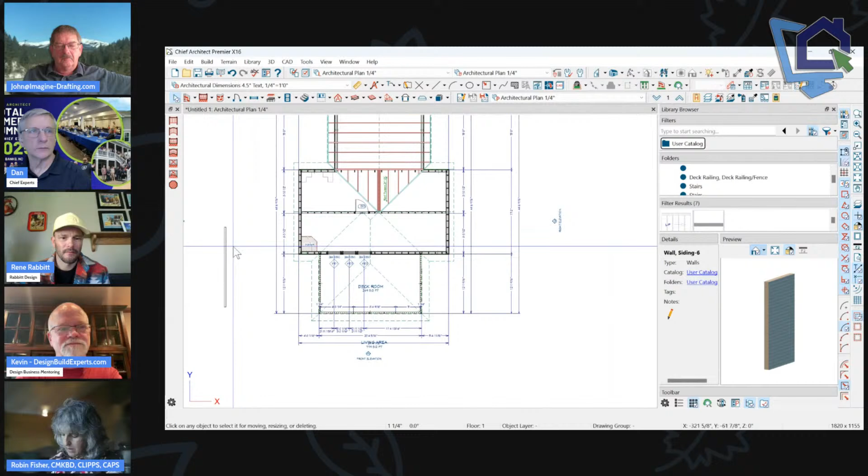Oh, hold on, let me try it again. So I'm drawing with walls now. Yeah, quit. Okay, let's try that again. So take a railing — we're going to make it into a library item, a deck railing, here it is. I'm going to come back here and draw with it now. Yeah, I don't have that selected.

And so the question would be, does that make a deck room? It did, it did, yes. So you'd have to have separate railing folders — one for regular interior railings, one for deck railings. I think there's something hard coded into the deck railing itself. I've never seen a setting for it that says this is a deck railing versus an interior railing. So if you wanted to style this, you'd have to go in and do all the work to style it, being that it exists as a deck railing first. But make sure you do it with the deck railing, not the interior straight railing.

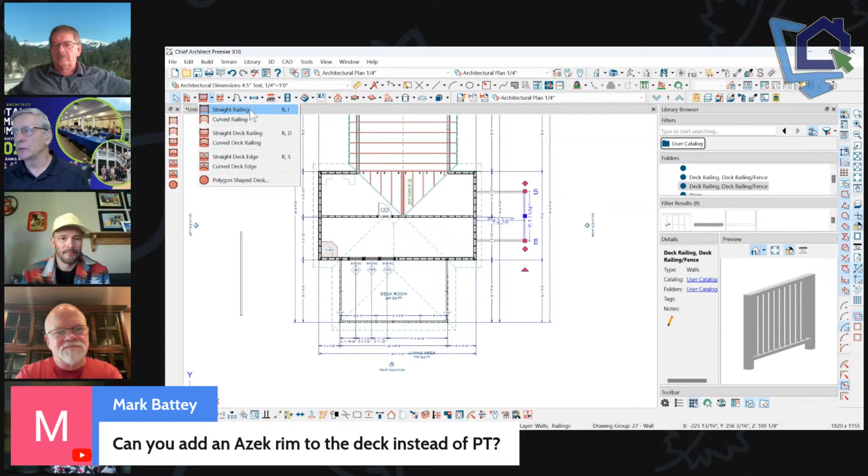Yes, absolutely. All right, can you answer this question quick — how can you add an AZEK rim to the deck instead of pressure treated?

There's - I've always done that manually. The molding polyline, I mean, that's just kind of changing the material, right? Yeah, I've always done that manually.

Let's see here. Can we set that up in a way to do this? You can set the nosing of the decking to whatever it needs to be, so that it still goes over top of the AZEK an inch, and then just draw a molding polyline around the deck and put your AZEK on that.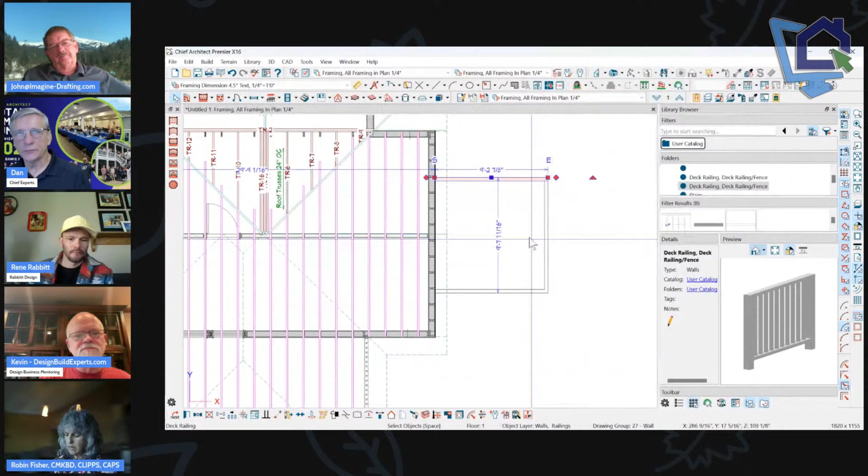Because you can in the railing, yeah. Well, can't you do it in the railing also? In the railing itself, you can have a double rim joist, so you can set that up to do a double rim in the railing, and then once it builds that you could name one of those. You could make that the AZEK material.

Half the time what I do is I just go Control C, and I'll snap. Oh yeah, I'll turn that off. And just make that my quarter inch, whatever it is, and there's my edging that I could make whatever size I want, put whatever material I want on it. That's generally how I would do it.

Now we also got the function where we can hit copy and hit reflect about, and we can now do it at a 45 without having to draw a freaking 45 line. So that's really nice too.

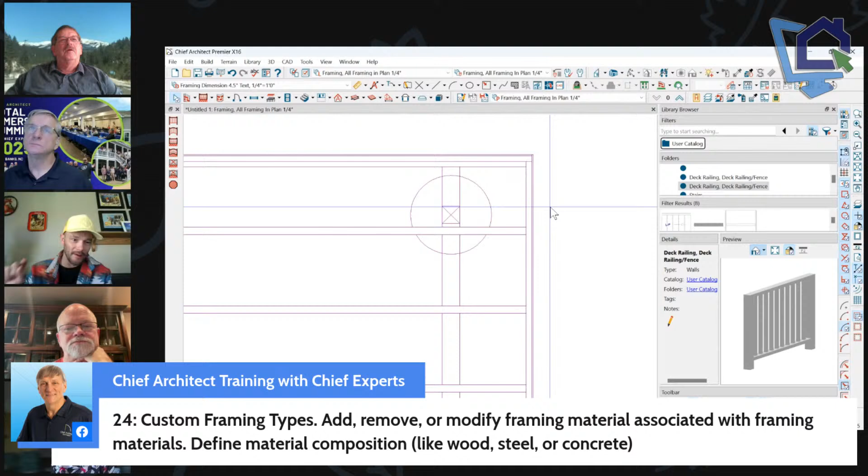So if you want to get kind of crazy with this, you can make a custom 3D molding - that's a millwork symbol that has your bottom rail with whatever rim board you want integrated, and you change the bounding box to just be the bottom rail.

Yeah, I have done that years ago. I did that with wanting the balusters to come down over the side of the deck. Although we can do that now without any problem.

I'm just going to guess that maybe 24 is about this kind of thing where you're trying to take a particular component and create a structural layering of materials within that.

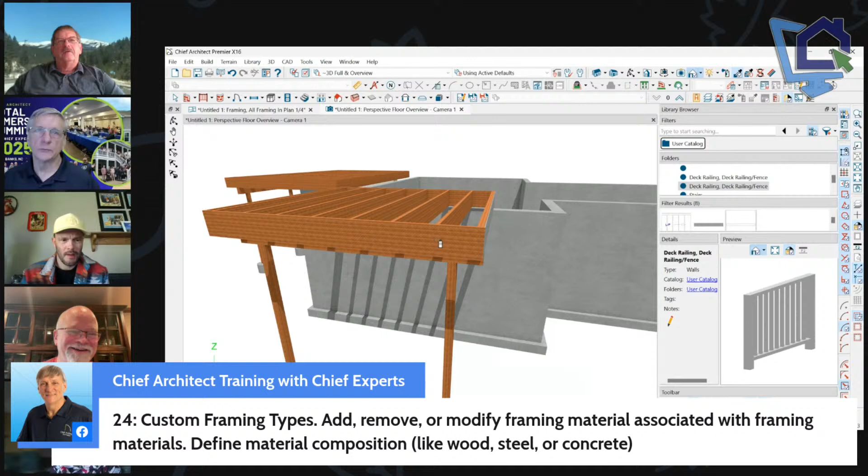Okay, well, I shut that down. Not sure what you said. It's not really obvious what that tool does - I mean, what that feature is. The what feature? Number 24, the one you were confused about. I was thinking, well, maybe this is the ability to do stacked layers of different materials. Oh, I don't know.

We're about out of time again. Let's talk about 3D dimensioning quick. And there you go - so I just added my 3D dimensioning.

This is really cool, I haven't used it much yet. Have you guys used it at all? No? I like the auto story pole - the 3D dimension story pole is pretty cool.

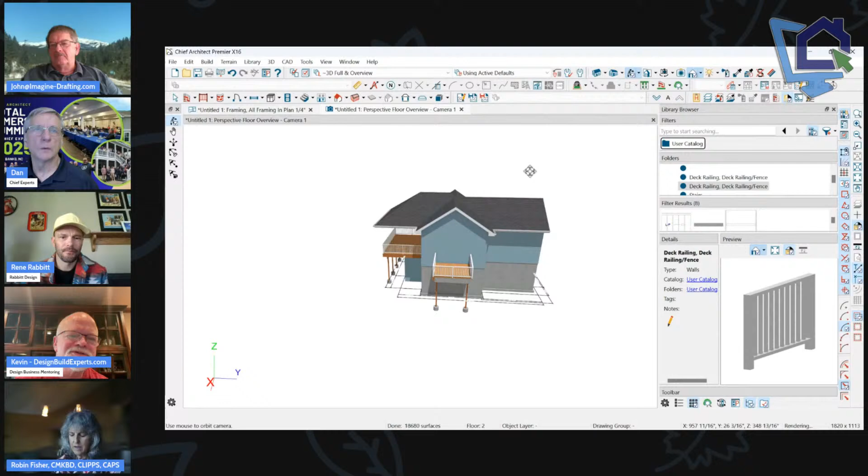They were so close last year when we were out there, and I was working with that guy on the 3D story pole stuff. When you rotated the house and the lines became there where you just passed and could no longer see the line, it automatically flipped to the next level. It was so cool. It's not doing it anymore.

They must not have chosen to implement that. I think it's an option to set, maybe. I don't know, I didn't see it as an option. Yeah, but you can spin that - makes a nice little presentation.

Oh, it does, yeah. Oh, I want to note something - will you go into edit the active view? If you have your AMD FidelityFX set to 2.0 instead of the native resolution, the super resolution there.

One more down, this one? Yeah, if you have that set down to performance, because maybe you're on a Mac M1 or M2 and you set that down to performance because you're trying to get performance out of this, the lines are actually raster image based - the text lines in 3D text. So potentially you won't see the lines in those modes.

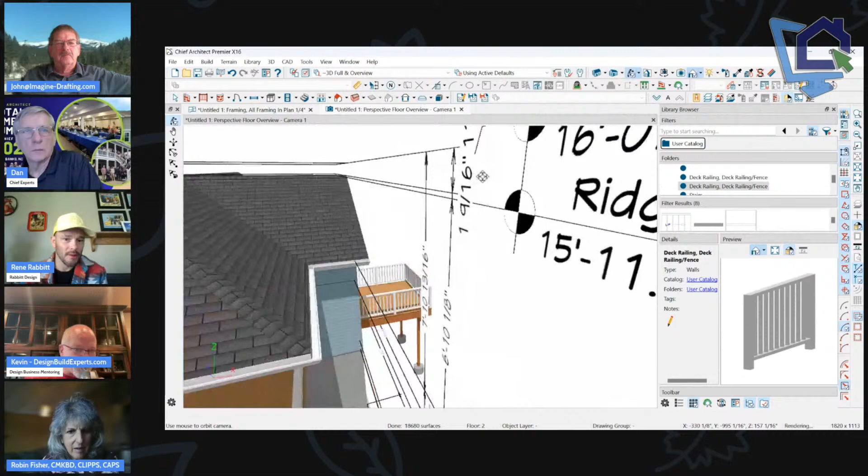So just keep that in mind. You might have to raise, if you're doing a ray trace, you might have to raise the sample rate to get those lines to show up. Yours are nice and bold. Great. Yeah.

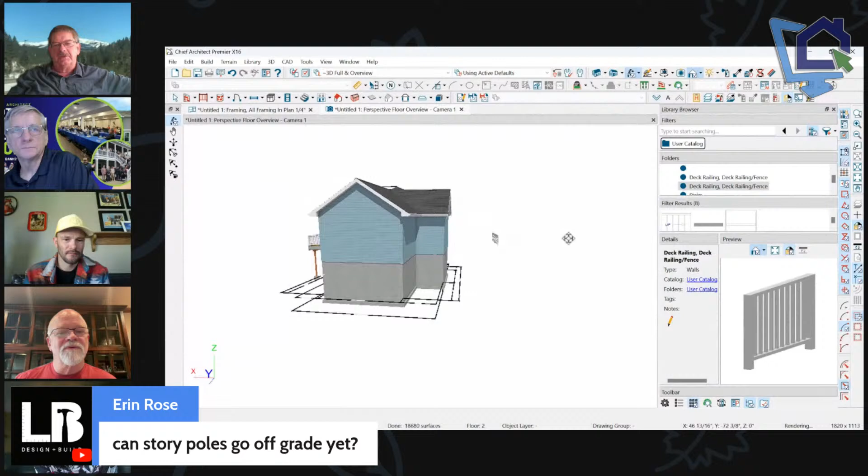Well done, we got one more question. Let's answer this one for Erin quick about story poles off the grade. It's under defaults for the story pole, that would be under default. Should we tell Erin that we've had that for a long time too? Yeah, we should.

Sorry, Erin. Where am I going, John? Marker form, locate elevations, right there. Yeah, right there, grade, first level, floor or grade level. You have to put in the number that it's going to be, the difference between the grade level and the house.

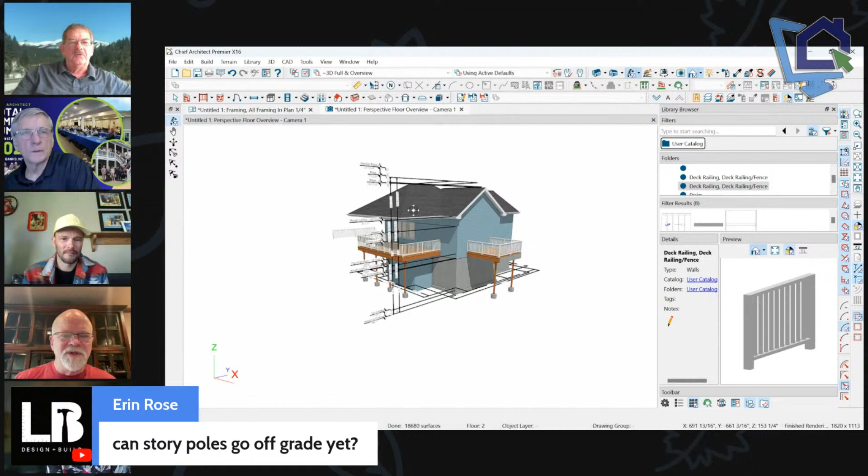So in this case, if the grade is higher, I would put in relative to the first floor subfloor maybe 5 feet, and that would put that. I probably have to redo the story pole. It's the buttons there that you want to look at, from grade or from first floor, whichever one is checked there, it's going to make that one zero. It would help to put grade in my plan, wouldn't it?

Yeah, but now you're getting it. So did it do it? Nope, do I need to redo this? Are you doing my story pole, is that an auto story pole? Yes, delete that.

No, what am I missing here? It didn't grab that. What did you have it checked at? Go back to the defaults, under dimension, auto story pole dimensions. I've got 60 inches, does it need to be minus?

Elevation reference, grade level marker, first floor subfloor, maybe I need to do that. No, you should have had it right the first time. If you want the grade to be zero, you should have had it right the first time.

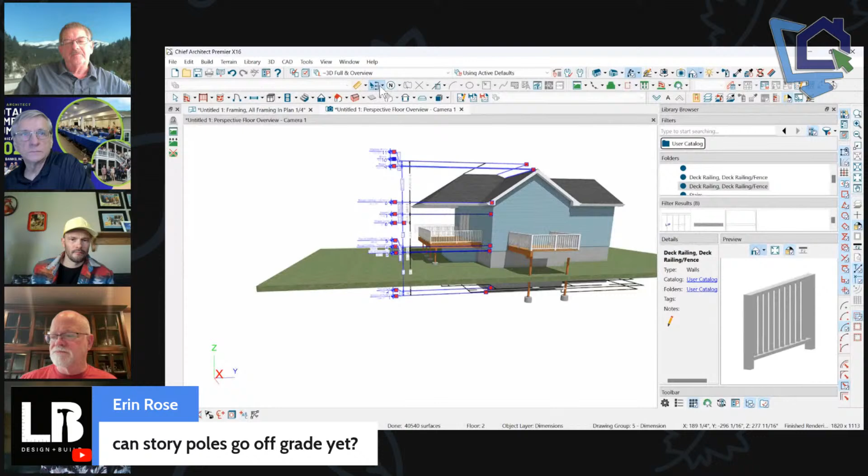Do an elevation camera instead of a 3D. Yeah, I was going to say, let me try that. Get a camera in straight, maybe. There we go, auto story pole. Nope, what are we doing wrong?

So there you go, it hasn't been there forever. No, it has been there for a long time. I know, I don't do a lot of story poles, so I don't really, and I usually just do them from zero or the floor.

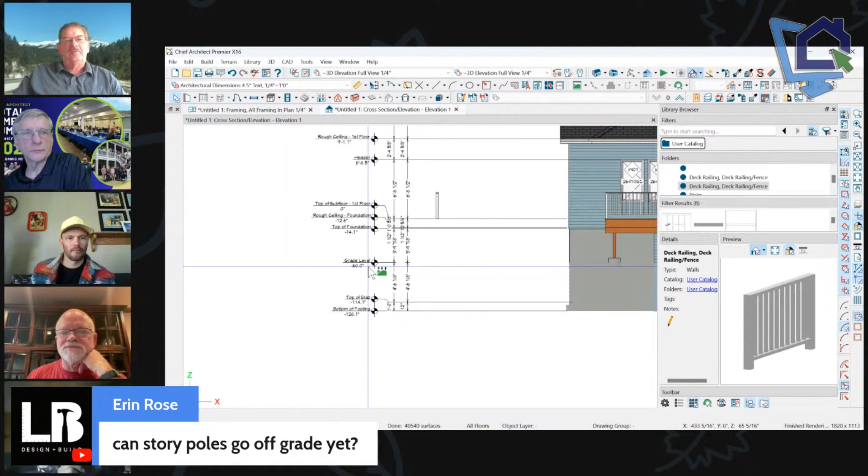Was it there? Yeah, grade level right there, put grade level in now. So I did put a minus number in. So I had to tell, when you do the terrain, you don't put in minus. Where'd my terrain go? You put in the separation between the top of the terrain and zero on the subfloor on the first floor, so it's a positive number, but in the callout I put in minus 60.

And then it put it in the right place, it put the grade thing in the right place.

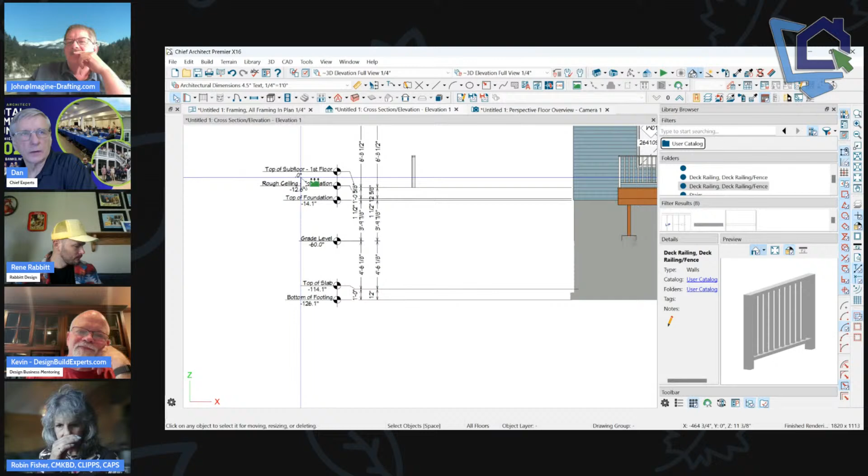So that makes top of slab minus, so that okay, that makes sense then. So the top of subfloor is 0 now. That's right. Okay, so that makes sense.

And then what else did I have set? Erin reminded me back in 2022 at the summit, I helped her figure this out, and we actually put in the actual mean sea level, and it populated everything correctly. Nice, I don't know how we did that.

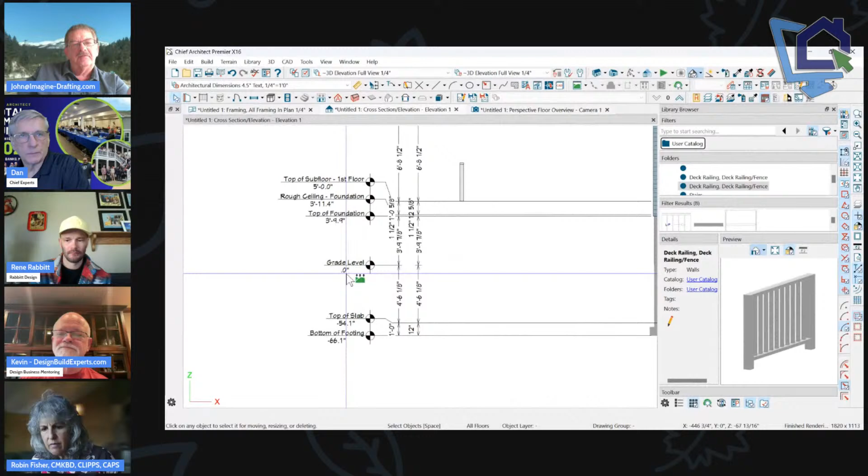Okay, so now I switched this up and I put, so from grade is 0 now, because what I did differently was I went in here and I put, I still have the same minus 60, but I put grade level marker, not first floor, subfloor. So now the terrain becomes 0. Okay, put in 224 feet there and see what happens. Okay, I could do that.

Mike has a lot of energy. He does. Mike's wanting a 24-hour Zoomathon.

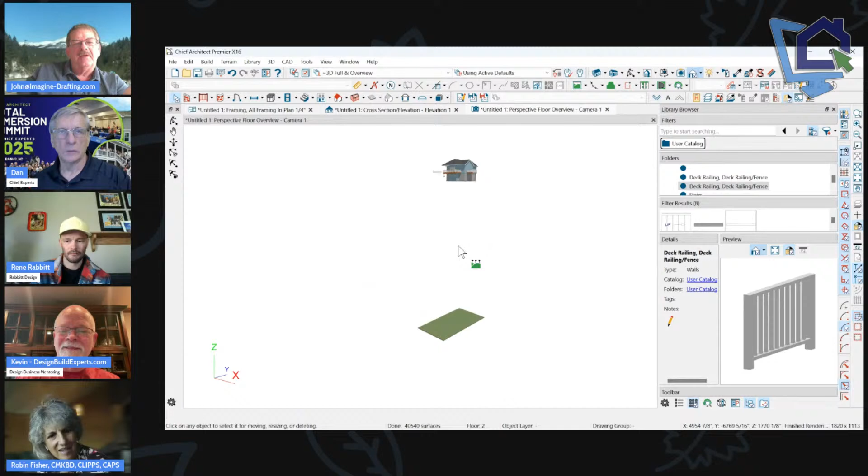And now go change the distance between the terrain and the house to like 226 feet, or minus 226 feet. Well, then I would need to add contours, wouldn't I? No, it should, just to see if it brings the grade. Well, it's going to put the terrain a long distance away from it. Right, which is fine anyway. I think it was along those lines we messed with it. So if anybody's interested, I could work on it and present it some other time. Yeah, again, I just don't do many of these, but here it's got the right numbers in that we've been messing with. Right.

Well, Erin's on the California coast, so is that why she needs sea level information? Because if you're working right on the coastline, you probably have to show that. Probably, they have to put their finished floor heights and stuff in at sea level. Yeah, that would make sense.